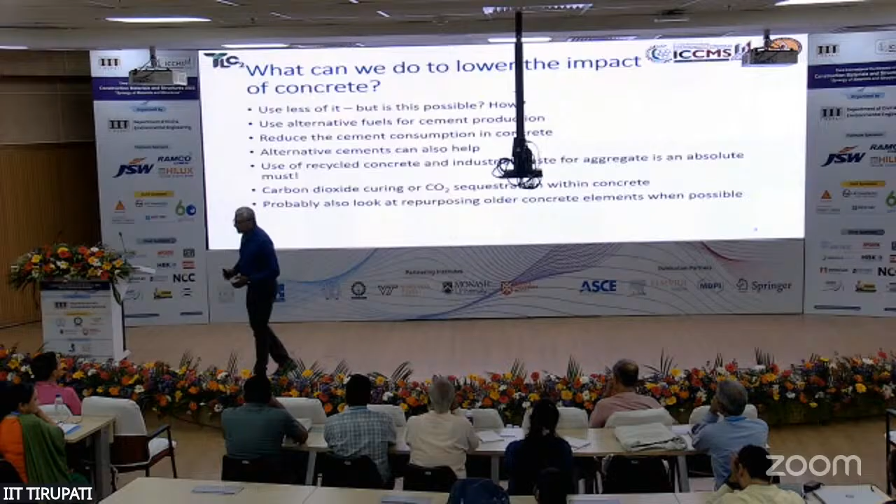With reinforcement, with structural concrete, we have to pay a lot more attention to what's going to happen in the long term. And we can also look at repurposing older concrete elements wherever possible, because there's no point in actually taking older concrete structures and demolishing to make aggregate all the time. But there may be some instances where the structural elements that we extract from buildings are in a condition that can be repurposed and reused in new construction.

Now, the only challenge there would be that you need to start thinking about designing the structure with that perspective in mind. You need to design for deconstruction. We know very well that it's not very easy to remove entire elements which are perfectly, which have a full dimension and reuse them in new structures.

So how do we design for deconstruction? Can we look at strategies by which we can remove concrete elements at the end of life? The end of life could not have been because of that element. Maybe something else caused the end of life for that particular structure. But can we remove these elements? Much like your Lego blocks, right? You have your Lego blocks, you put them up in certain shapes and sizes, and then you can actually remove the Lego blocks to get the pieces back again, reassemble in a different form.

And most important, obviously, if you want to really reduce the impact of concrete, is use it in such a way that it lasts for very long. In other words, make structures durable. If you make structures durable, you don't have to repair or replace structures very early. You have a longer life, and that makes your overall net footprint over the life cycle of the concrete structure reduced.

Now, let's look at some of these topics and understand what are some limitations which are bogging these down. For instance, alternative fuels. What are the options for alternative fuels? We have petroleum coke or pet coke. This is already being used in a big way by cement plants. It reduces dependence on coal, but the only problem is it's even worse in terms of emissions, right? So while we are reducing natural resources like coal, petroleum coke, again, is something which induces a very large amount of emissions.

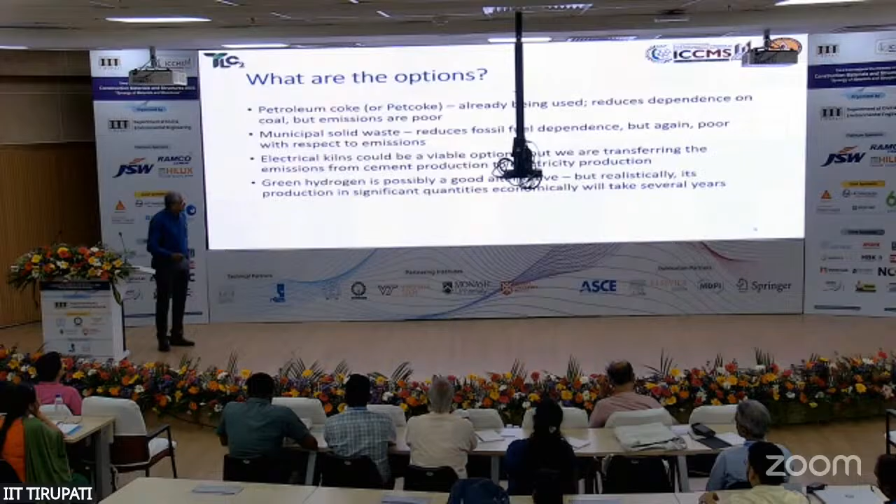And again, as I said, green hydrogen, realistically, to make green hydrogen, that is basically from the electrolysis of water, so that you don't release any other gases into the atmosphere. So green hydrogen is something that will become a reality only when the cost per kilogram of hydrogen comes to a reasonable amount. Right now, in some countries, they've achieved certain levels of economy with what they call brown hydrogen, which is not entirely from an emission-free process, but they have had some success in bringing down the cost of hydrogen. But this is something which is a subject of avid research.

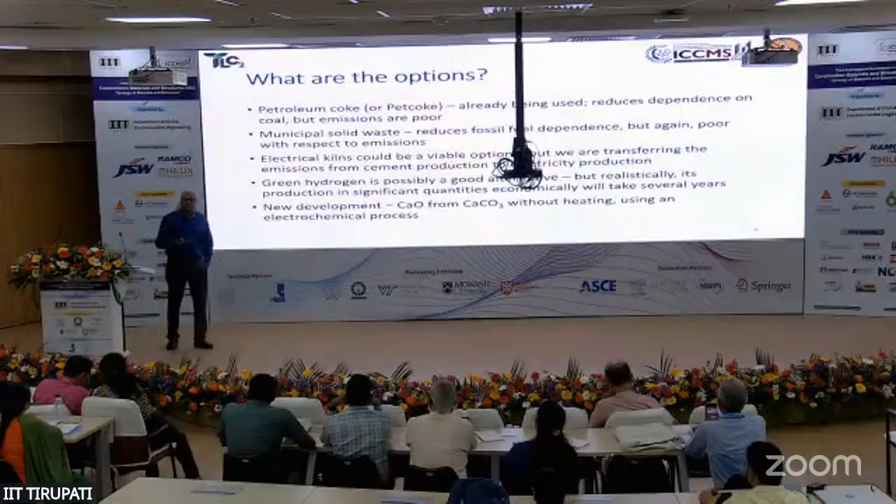A lot of people are looking at how to produce green hydrogen in an economical manner. Now, the other development is using calcium carbonate as a source for calcium oxide. But unlike in the regular cement manufacture process where we burn it at temperatures that release the CO2, can we have some electrochemical processes that can extract calcium oxide from CaCO3? So that's something which has also sparked off some interesting research around the world.

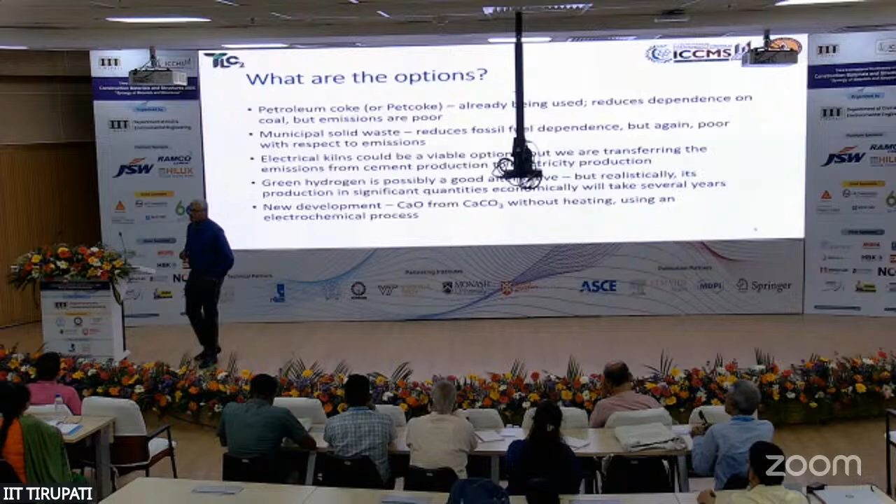Okay, but again, the question will come: is this process itself green? Is this process itself reducing the overall emissions, or does it need so much energy that you are anyway going to be emitting? So again, when we take up any of these research topics, especially to the students, we need to evaluate holistically what should be the overall impact. Because there may be one thing that you're doing that looks greener, but then you have another thing that basically could make the entire process completely negative.

So let's look at, of course, the second topic, that is supplementary cementitious materials. This is, as I said, accepted worldwide as the best way to actually reduce the impact of cement. Now, we have to, of course, pay attention to what is available in terms of SCMs. It turns out that many of the SCMs are either available in large quantities, but are difficult to get to, or they are available in small quantities and will not really serve the needs of the future generations. So what are we primarily talking about, at least in India, when we talk about SCMs? We are primarily interested in fly ash, right?

Okay. Anyway, fly ash, you all know very well, India's dependence on coal-powered power plants is not going to go down anytime soon. Our power demands are too high. Currently, our power generation from coal-fired plants is nearly 75% of the overall power in the country. So it'll take some time for that to come down. But until then, we have the fly ash available. Only problem with it is of variable quality. There's a lot of variability in the fly ash quality.

So only some of it can be processed and obtained to a quality which is consistent for cement production or for concrete production. So you need to be aware that not all fly ashes will give you consistent performance. You need to ensure that the physical and chemical characteristics are controlled. And that's not something which can be done for free. That has an associated cost. So there are companies which are now selling processed fly ash. And that is something which should develop a little bit more for us to really utilize fully the potential of all the fly ashes that are currently available in the country.

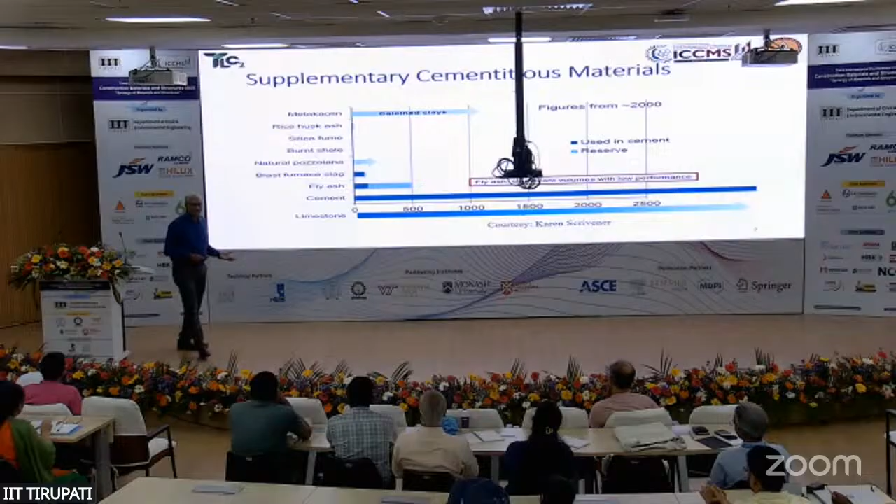The other possibility, of course, is clay-based systems like metakaolin, where you burn kaolinite clay at a temperature that induces reactivity. But then metakaolin need not be the only possibility. That means very high purity kaolin is not always needed. The research that we've done for several years on limestone calcined clay cement has shown that we can work with much lower grades of calcined clay, which are perhaps overburden in kaolinite mines and available in very large quantities and not really usable where kaolinite is needed, because they need a very white kind of clay. So this is mixed clay, which has red, brown, or yellow colors. And that is not suitable for the ceramic or paint or paper industry. So that's a lot of source for calcined clay that is available.

But then we don't really know how much of it is there. We need to do a lot more prospecting and find out how much quantity is realistically available for utilization in concrete purposes. Now, of course, limestone is the ingredient that goes to manufacture Portland cement.

Interestingly, in the country, there is a significantly large amount of limestone available for cement production. But it turns out only about 8% of what is available can actually be mined for cement production. And among this 8%, you always extract a lot of other material from limestone mines, which is not of the right purity to be used in cement production. So there's a lot of low-grade limestone available at these mines, which could potentially also be a resource for your supplementary materials. So that's where we need to also pay attention to.

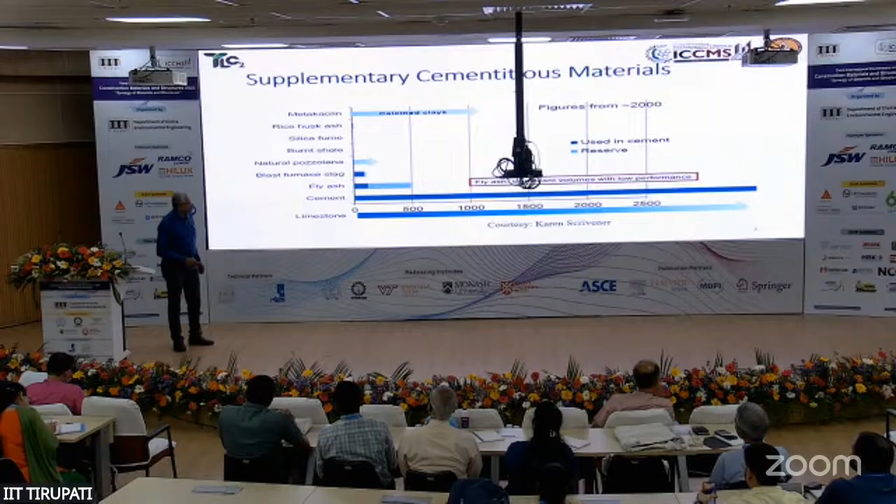Why do we need to do all this? It's been estimated that, at least in India, if we utilize all the available limestone to only produce Portland cement, then our limestone reserves, which are good for cement manufacture, may not last beyond 50 years. So you have to look at finding replacement materials, and that's probably the best way to think about why we need to replace cement.

And of course, in terms of a sustainability perspective, use of mineral additives is definitely a positive thing, because you are reducing the utilization of cement clinker, which leads to a lot of CO2 emissions. You're utilizing waste from other industries. You are also having an impact on the long-term durability. So net cost over a life cycle comes down. There's reduced potential for damage and deterioration in the long term, except in certain circumstances. So smart thinking would be only to use blended cements and not use ordinary Portland cement at all.

I think there are a lot of structural engineers here. You need to really take that step and promote only blended cements. No more relying on OPC. Please ban the use of ordinary Portland cement. You have to use only blended cement. We have to work with blended cement because that's the best way to cut down CO2 emissions from OPC. And if we work with blended cements, whatever be the shortcomings in certain exposure environments, we need to find ways to overcome that by smart design. Those tools for designing concrete are today available.

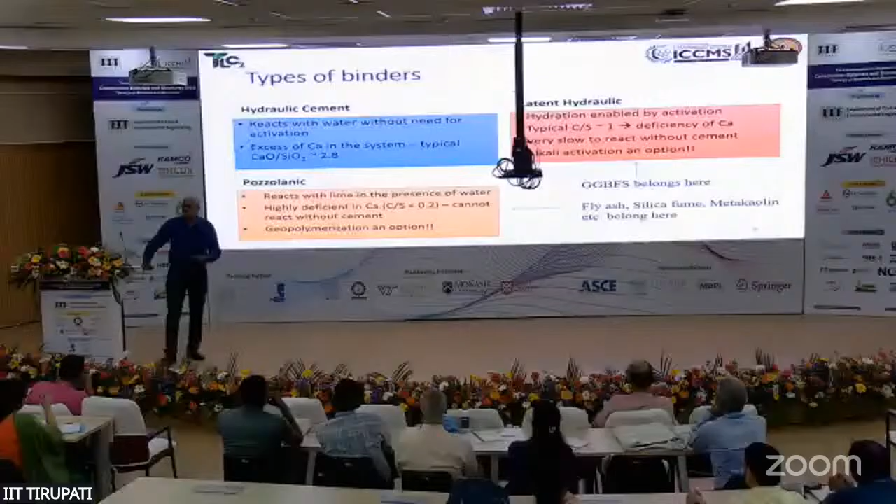So we have, of course, different types of binders. We need to realize what can perform where. So, of course, we have the latent hydraulic binders like slag, which have a fairly good amount of calcium to silicon ratio, which causes activity if you have some sort of activation done using an alkali or a sulfate.

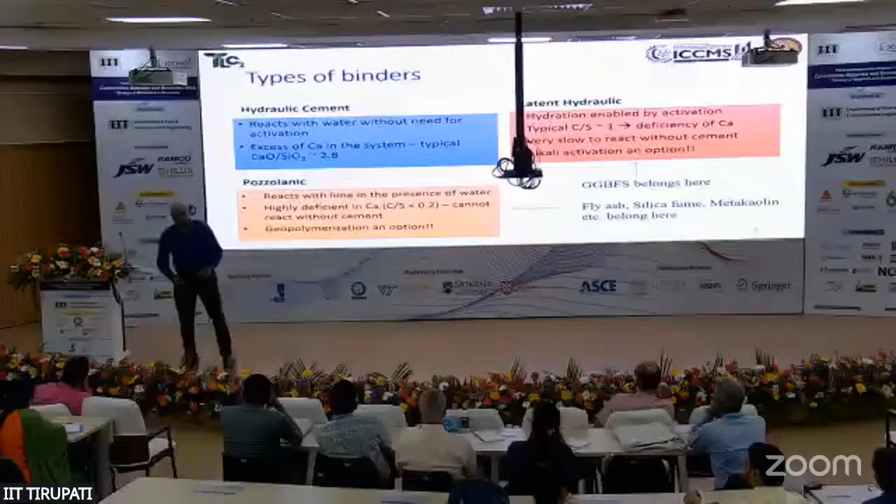But then you have pozzolanic materials, which are mostly rich in silica, and that silica has to be in the amorphous form. So there you have a deficiency of calcium. So you need some sort of a lime-based system, either lime produced from cement hydration or lime added onto the system to induce reactivity in the pozzolanic material. So depending upon the composition of the material that you have as a mineral additive, you can have different kinds of chemistries exhibited by these materials.

Now, what about concrete durability with supplementary materials? This is part of some research work that we had done, comparing the performance of concrete with ordinary Portland cement to concrete with 30% fly ash replaced cement, and then limestone calcined clay cement. So this was from an industrial production of limestone calcined clay cement that was undertaken by one of our cement companies.

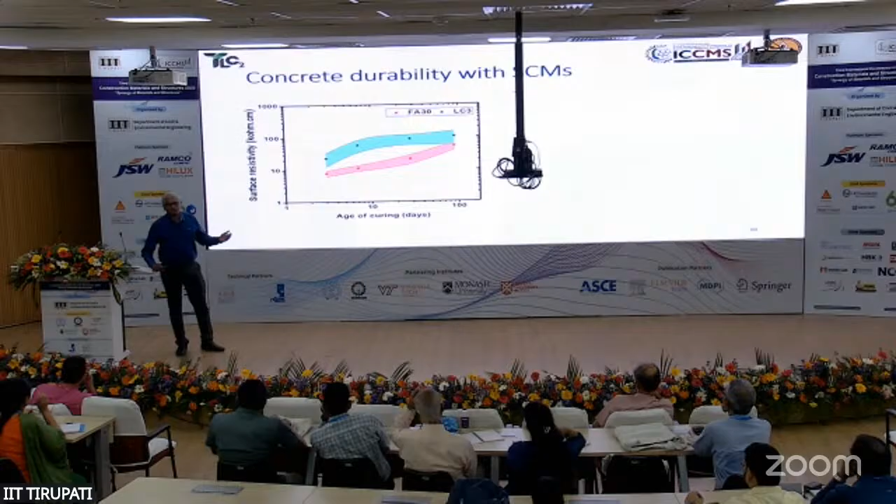If you look at resistivity development with respect to time, you can see that compared to fly ash-based systems, which eventually develop the same level of resistivity, the LC3-based systems are developing this much faster, obviously because calcined clays are a lot more reactive, and that kind of reduces the overall conductivity of your system and improves the resistivity at an early age.

And if you look at the non-steady state migration coefficient, which is today used to do a lot of durability design in chloride exposure environments, you clearly see that even for low grades of concrete like 30 MPa, your LC3-based systems are able to reduce the non-steady state migration coefficient to less than 2 × 10^-12 square meters per second, which is actually an acceptable limit for a very high quality concrete, right?

For instance, in the Mumbai Trans-Harbour Tunnel, that was the limit specified for the bridge and tunnel elements. So you can imagine that level of durability. That was a 65, 70 grade concrete. But here, this is a 30 MPa grade concrete, and you're able to get still a very high level of durability. So this goes to show that when mineral additives are used, you have the potential to improve durability, especially in chloride environment, at lower levels of structural strength.

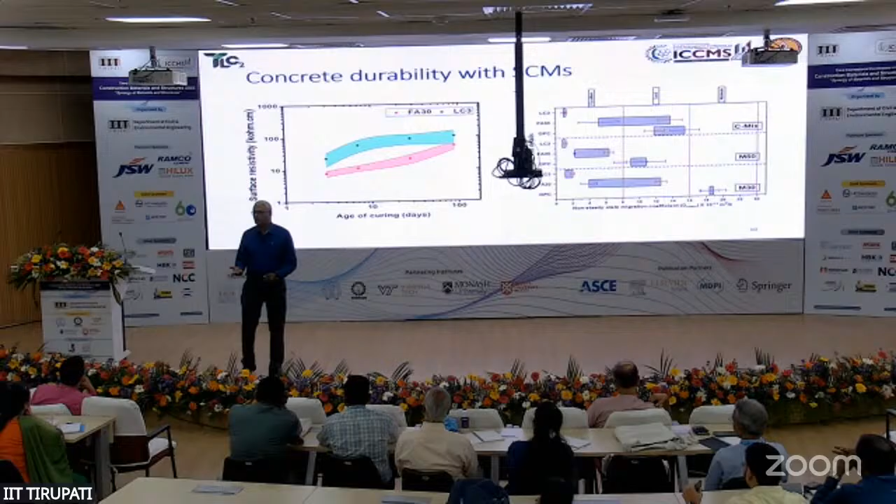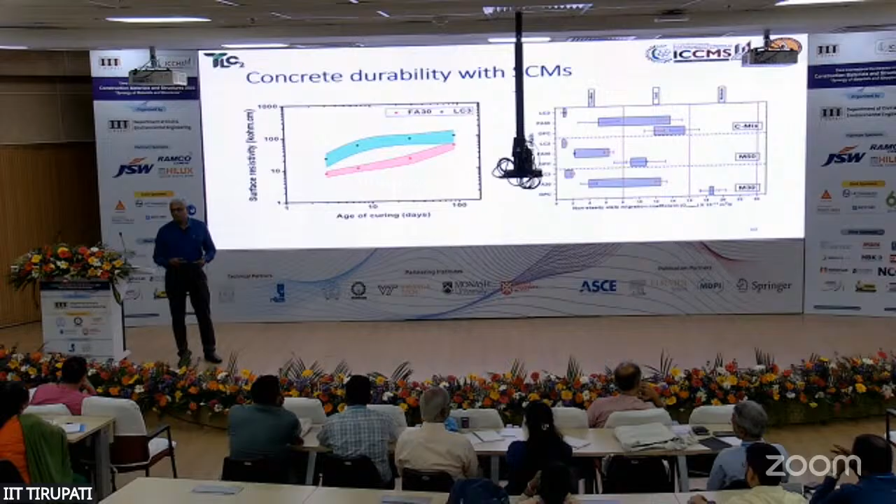And you don't always need very high structural strengths. The previous methodology of concrete design was you design for a higher strength, so you also get higher durability. But how high do you want to go in strength? Why do you want to unnecessarily keep increasing your strength? Your brittleness also goes up. You have a lot of other problems, autogenous shrinkage. All of those things can be avoided by simply looking at mineral additives to increase durability at lower levels of strength. Now, what we also have to look at is the impact through life cycle assessment.

So at IIT Madras, under Professor Gettu's leadership, we undertook a lot of interesting studies to actually collect the data from cement plants and look at the sustainability impact of utilizing alternative materials. So we were able to attribute all of those different aspects like direct emissions from limestone, fossil fuels, pet coke, alternative fuels, electricity, transportation, and any other CO2 or energy inducing system that comes in the manufacture of the cement process.

And with that, we were able to calculate that your blended cements had much lower CO2 emissions overall, like your Portland slag cement, obviously because we are using very high quantity of slag as a cement replacement, is leading to a much lower emission as compared to OPC. Now, it's not enough to just say that you're emitting less. Are you emitting less over a life cycle? Are you also producing durability in the concrete? So that's where we actually combined the emission aspect with the actual durability in different types of exposure environments.

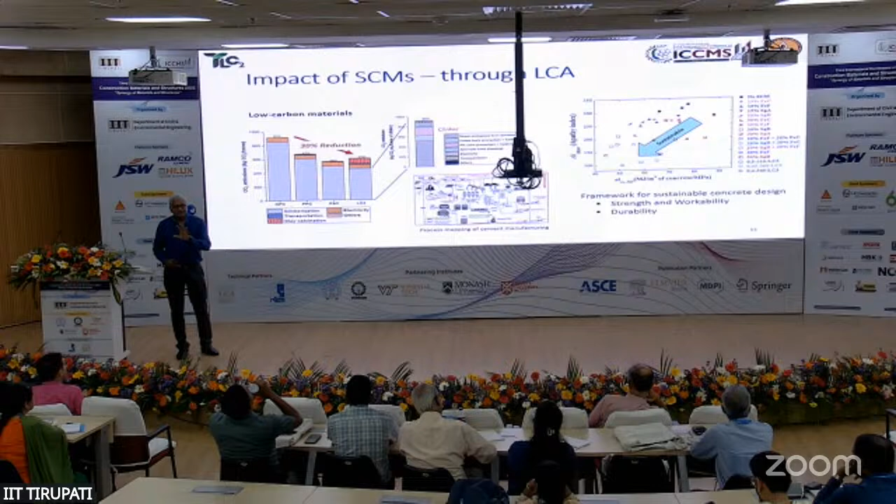On the other hand, on the x-axis, you have the energy intensity factor, which normalizes the energy for production of that 1 cubic meter of concrete with 1 megapascal strength. So here in one shot, you get strength, you get energy, you get CO2, you get durability. And with this kind of an approach, you're now able to look at the sustainability impact of different types of combinations and use this as a basis for determining the right strategy for concrete mixture design.

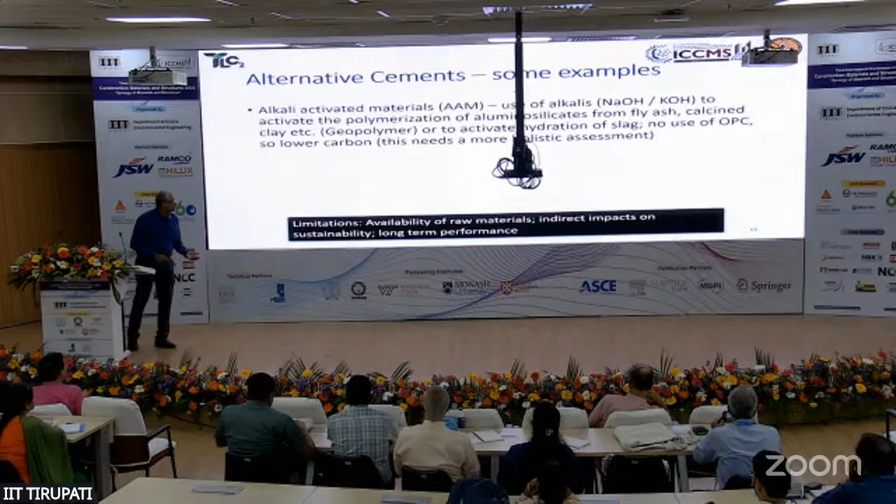Now, alternative cements, I said, you have, of course, alkali activated systems where alkalis like sodium, potassium hydroxide are used to activate polymerization of aluminosilicate materials like fly ash or calcined clay. Or in case of slag, you do alkali activation of the hydration of slag. You produce slightly different systems with both of these approaches, but ultimately you're working in a system without any Portland cement.

Now, calcium sulfoaluminate belite cements, again, in China, these are really big. The idea is that you produce cement at a lower temperature, with the right kind of approaches of selecting the right raw materials, and overall lower carbon dioxide emission happens in this process. The only problem here is the alumina sources that you need are quite expensive, like bauxite, for instance. Even to produce calcium aluminate cement, the bauxite could be very expensive as compared to limestone. Magnesia-based cements, I already talked about. These are essentially cements that absorb CO2 over their life, and then the net CO2 becomes negative.

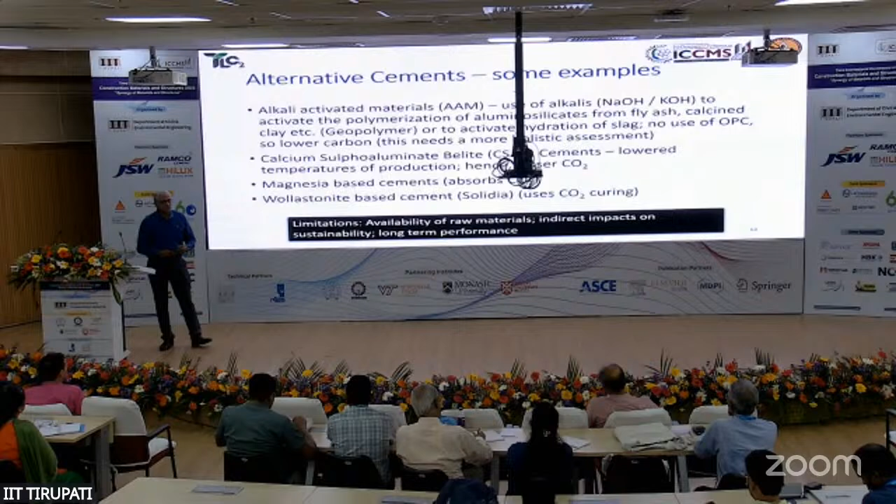Wollastonite-based cement has also been used. Solidia is a company in the US that came up. It used carbon dioxide curing to convert the wollastonite-based systems into CSH and calcium carbonate. Now, unfortunately, many of these companies that looked at these alternate cements really did not get the right business and closed down. In fact, even companies that came up with geopolymer systems commercially did not really do that well. Although there have been some companies that have had some level of success in niche markets.

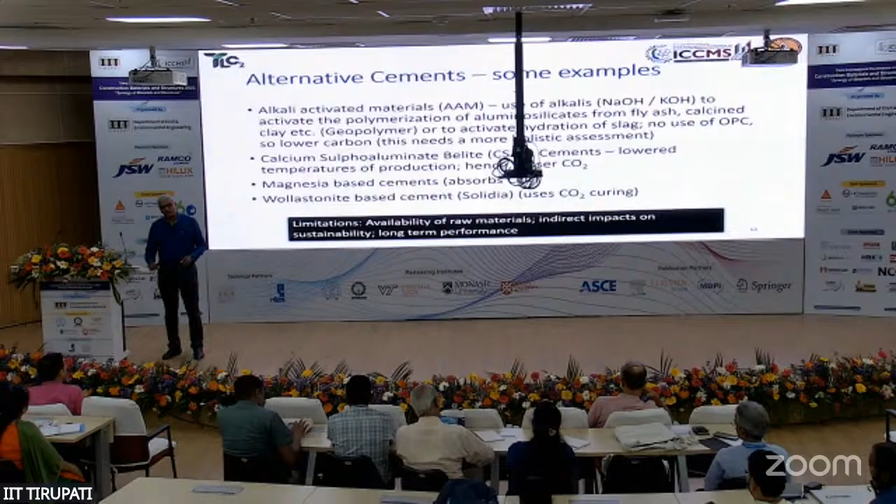Again, we have to look at the scale. Are we able to address the problems at scale? In Portland cement, we're talking about 25 billion tons of concrete. Now, that's the scale that we need to look at. Are the materials that we're proposing capable of making a difference at that scale?

Maximizing aggregate in concrete obviously is very important from the point of view of reducing cement, and that automatically reduces your CO2 impact, right? How do you maximize aggregate? One strategy could be particle packing. This is a concept that we borrowed from the powder metallurgy industry, where they look at particle distributions and then optimize them so that the material can get the best solid packing without much voids in the system.

So particle packing is an approach which could be followed. It's a very simple approach to follow for mix designs, brings about better economy. And of course, because you're having greater amount of aggregate in your system, it gets better dimensional stability.

Now, this example from Sweden and the bridge tunnel system connecting Sweden to Denmark between Copenhagen and Malmö. This has a tunnel, dredging and reclamation and a bridge. It was designed for a 100-year service life. And note that all of this was done at total cementitious contents of well less than 450 kilogram per cubic meter. Here, they had used the particle packing system to bring down the need for large amounts of cement.

Because obviously, structures are going to be massive. If you put more cement, there's going to be a lot more heat generated. You want to avoid heat-related problems. So this is one possible way of actually reducing the extent of cement, increasing the aggregate content, get better dimensional stability, reduced heat, and still produce concrete that is highly durable.

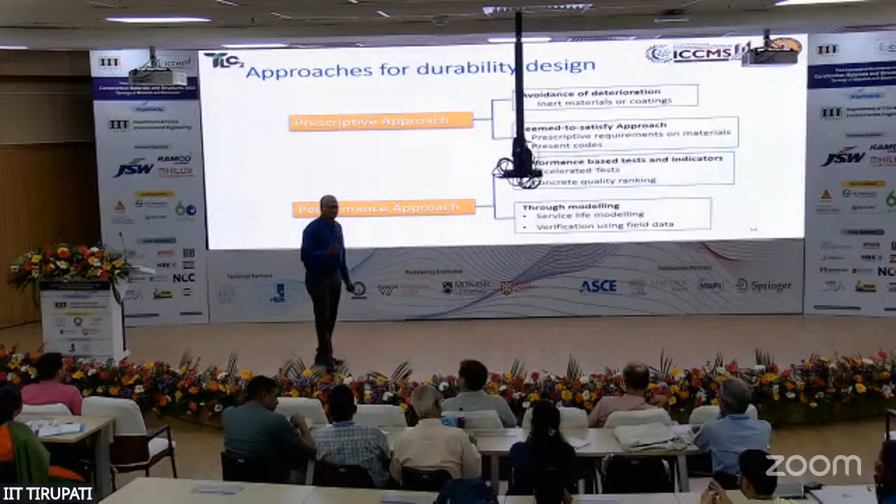But what it doesn't seem to touch upon is how is this concrete being put in service? What are we doing in terms of compaction, curing, workmanship? Are we paying attention to the initial concrete temperature? Can we then start looking at bringing those things into the specs and defining what is the performance that we need? And that's what is called the performance approach.

So just to give you an example, prescriptive specifications can include curing duration and method, say 7 days curing by water fogging or ponding or something like that, you say that minimum cement content should be so much, maximum water cement ratio should be so much, you have to use only this type of binder. Those are prescriptive specifications. A performance means you are having a measurable parameter that you're defining.

Now, interestingly, in many of your specs, you would have already seen cover depth as a prescriptive spec. It'll say that for an extreme exposure environment, use 75 millimeters cover depth, right?

What can we do here to make it a performance spec? We actually measure that cover. And measurement of cover is not that difficult. You have cover meters available, very cheap for construction sites, not a problem at all to actually get these cover meters. Determine cover, not on all the elements because that will put off your project by several months. You want to do it on some selected elements to ensure that people have been paying attention to actually doing the right job with performance specs.

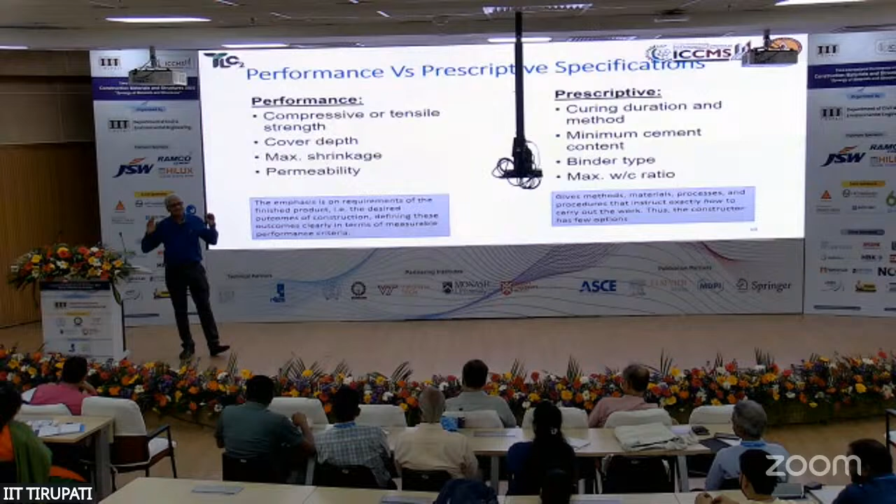Now, I often joke that when we enter hotels in India, we have this metal detector. Doesn't matter what you have in your pocket, it always beeps, right? Maybe in a construction site, we have one of these large detectors. When the truck arrives, it beeps. It gives the contractor some idea that, okay, somebody's checking something that I'm doing, right? Maybe that would have been a good idea to increase durability on construction sites.

Now here, a performance spec example is the new Panama Canal, which was looked at to determine what would be the control of the concrete quality on site. So here what they did was they established the concrete quality that is needed in the lab as 1,000 coulombs of rapid chloride penetration. And they correlated that with a field-based test, that is the resistivity measurement. And they found that for a certain level of chloride penetration, this is the resistivity that I want to have in the system. They use the resistivity to actually measure the parameter directly on the constructed elements.

So look at this. We don't have to rely anymore on lab specimens. We are actually measuring directly the durability on the site. Of course, there are issues with using resistivity directly because you need to be aware of the moisture conditions, presence of reinforcement, several issues are there. But if you play within the confines of what this can do, then you really have an approach which can be utilized to determine durability of constructed elements.

Again, an example from Doha Metro. This is an L&T project where they looked at different types of concrete elements in the same metro construction project. You had concrete in contact with the ground, concrete not in contact with the ground, and high-strength concrete for internal columns. So obviously, we know that when concrete is in contact with the ground, we need to have protection against chemical attack, if your ground has sulfates or chlorides. Concrete not in contact with the ground, there's obviously going to be carbonation, right? So the tests that were prescribed here to be done on the concrete and the limits were to ensure that the durability performance in those environments will be perfectly satisfied.

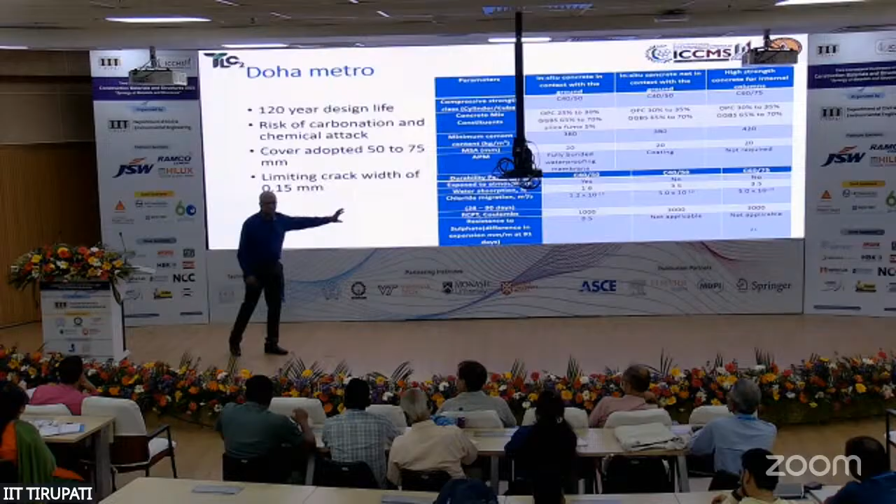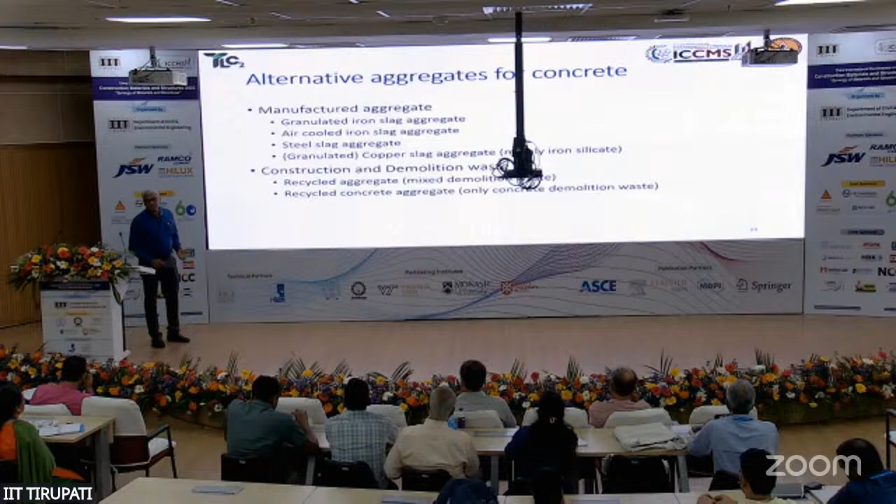Alternative aggregates, I think you'll have a lot more discussion later. I'll probably just touch upon it briefly. You have manufactured aggregate, which is from industries, or construction and demolition waste, where you actually crush the demolished concrete and utilize that as C&D waste. Now, the challenge obviously is, again, do we know where it is available? Is there a good spread? Can we arrive at a proper understanding of the logistics? Do we need to process and remove unwanted material? And what is the cost and energy impact of this processing? Is that going to induce more cost, more energy, more CO2? That has to be perfectly calculated.

Sometimes, of course, processing demands a lot of energy. And what is the long-term stability of many of these materials? Are they going to be stable in the long term? Because concrete we want to serve for a very long period of time. Do we have that level of stability from these materials? And for recycled aggregate, how to work out a sustainable method for processing. Again, a sustainability framework is very important. We need to look at all the possible operations that go into actually utilizing demolition waste, calculate the CO2 and energy impacts, and then evaluate whether the system is actually working for us or not.

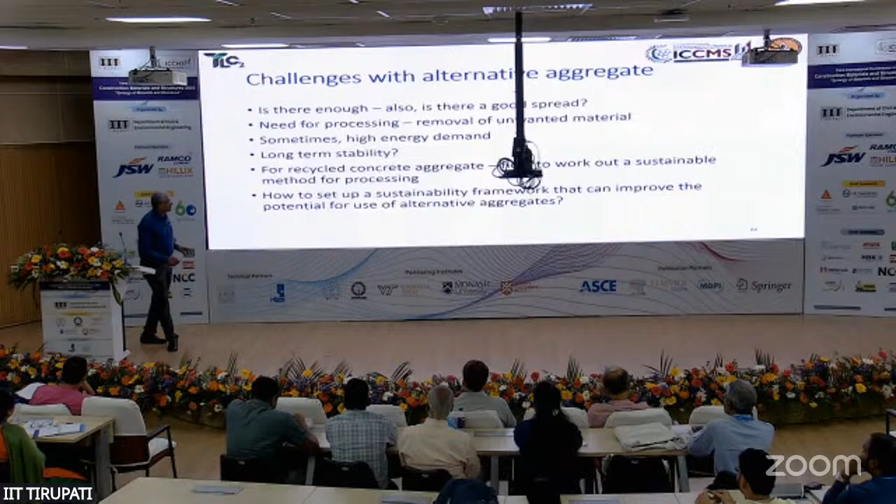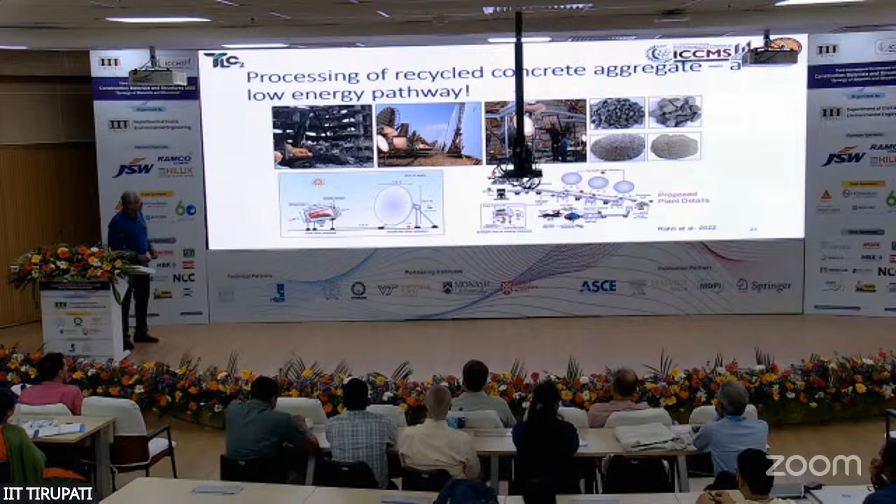One example of work that was done by my colleagues, Professor Gettu and Professor Surender, is to look at using concentrated solar to break down the mortar from the aggregate. And using this process, they were able to supply sufficient heat for thermal beneficiation and later crushed to obtain coarse aggregate, fine aggregate, and recycled concrete fines. So this approach is something that needs to be scaled up. We are still looking for possibilities with which we can scale this up. This was done at a facility in Mount Abu in Rajasthan. And CO2 curing reabsorption, I'm not going to talk too much about it, but several alternatives are based on net zero CO2.

Again, the issue is this science is still at a nascent stage. A lot of people are making a lot of big claims about it. My suggestion is take everything with a pinch of salt. We need to analyze these systems very carefully. They are not really all that they seem to be, okay?

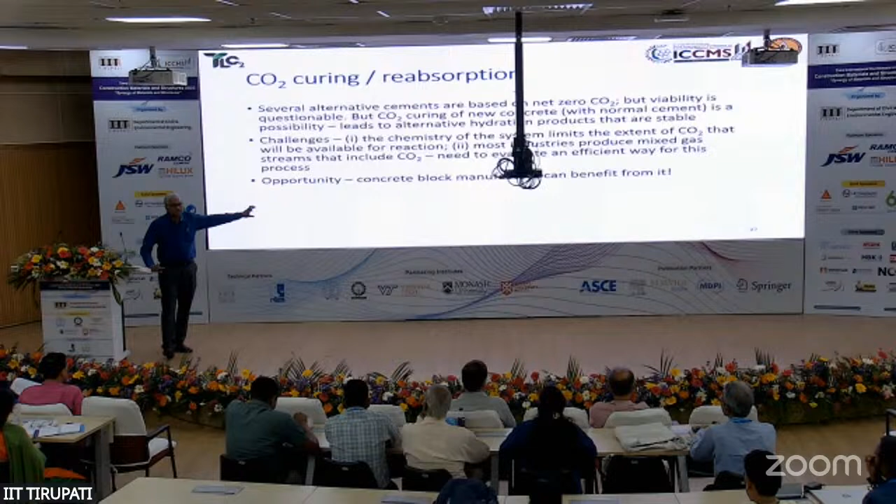The opportunity, of course, is that you have concrete block manufacture for unreinforced concrete elements, which definitely can benefit from many of these strategies.

Right, okay. The bigger picture: materials is only one part of the story. There's a lot more to be done to make structures sustainable. The process is extremely important. You need to look at the overall process of putting together your structure. As I said, today's emphasis, if you look at how electrical systems and appliances are being designed, people are looking at lowering operational CO2 and energy. We also have to pay attention to embodied CO2 and energy, which is why understanding material characteristics is absolutely important. And policy also needs attention.

One example, again, use of construction demolition waste. There are places where natural aggregate is available much cheaper than C&D waste. So why should the contractor bother with choosing C&D waste when they can get natural aggregate, unless there's a policy that drives it? For instance, in Singapore, they mandate that 20% of your concrete has to have recycled aggregate in it. That's a strong policy in favor of actually using C&D based systems, irrespective of the cost.

So obviously, this needs a concerted effort across different time scales, different scales of study. So we have set up a very large center. Tomorrow I'll talk about this in the workshop. This is the Center for Technologies for Low Carbon and Lean Construction. Somehow that, okay, maybe it indicates that my time is up. So thank you all very much.

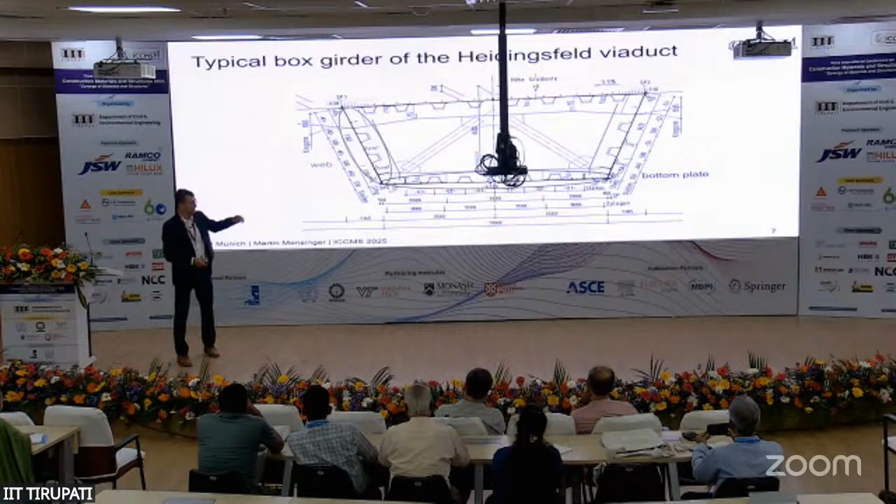During launching, in the web and also in the bottom plate, we have to face biaxial stress in the plates, because we have this hogging bending moment at the pillar, which causes stresses in the X direction - the longitudinal direction of the bridge. We also have the introduction of the bearing forces into the web, which causes vertical stresses in the Z direction. The bottom plate is stressed with biaxial compression from the bending moment, from the inclination of the webs, and additionally from the shear flow at the support.

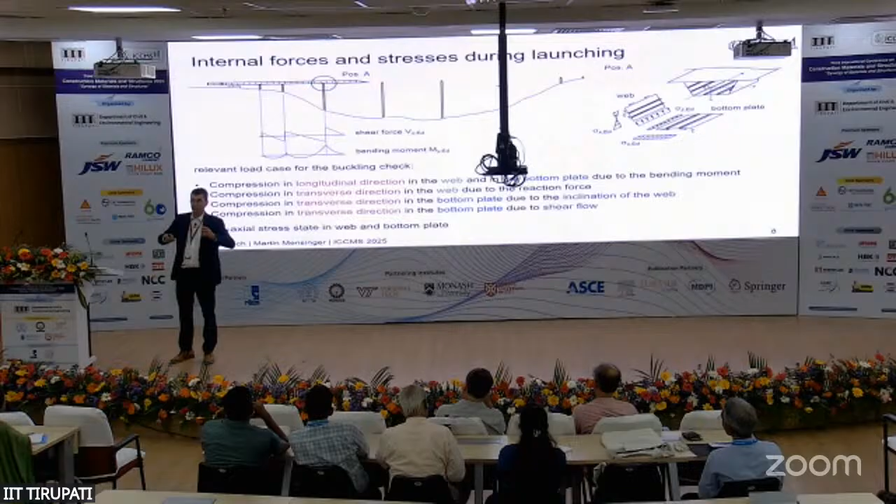So we have to design those plates against buckling under biaxial stresses. In addition, this design check normally rules the thickness of the web plates and the bottom plate. Therefore, it's really essential for a material-efficient construction to optimize those design checks. During erection, we have two different sliding systems that we use for launching.

Those two different systems of launching devices are influencing the buckling behavior of the plates, which is not covered by the codes up to now. At the moment, the codes just recognize in-plane forces, but no bending moments from eccentricities. And those bending moments from eccentricities are influenced by the launching device which is used, and there are significant differences. That was also one of our major things we focused on in our research.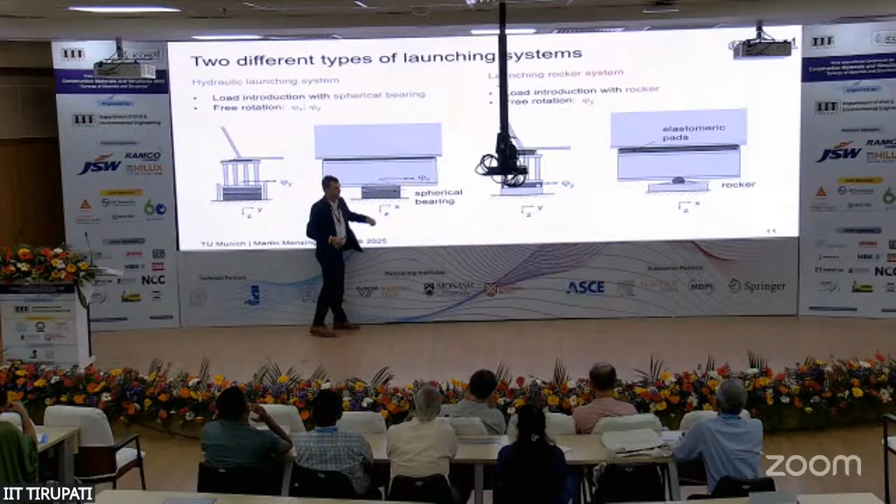Okay, now let's talk about those different bearing systems. The big difference is a degree of freedom around the longitudinal axis. In case of the rocker bearings, we can allow only a behavior like that in the longitudinal direction of the bridge, but we don't have this degree of freedom around the longitudinal axis as we have it in the case of the spherical bearing. So we have totally different bearing conditions, which is not considered in the buckling checks.

We were interested how those bearing conditions influence the buckling behavior of the web plates and the bottom plates of our bridge.

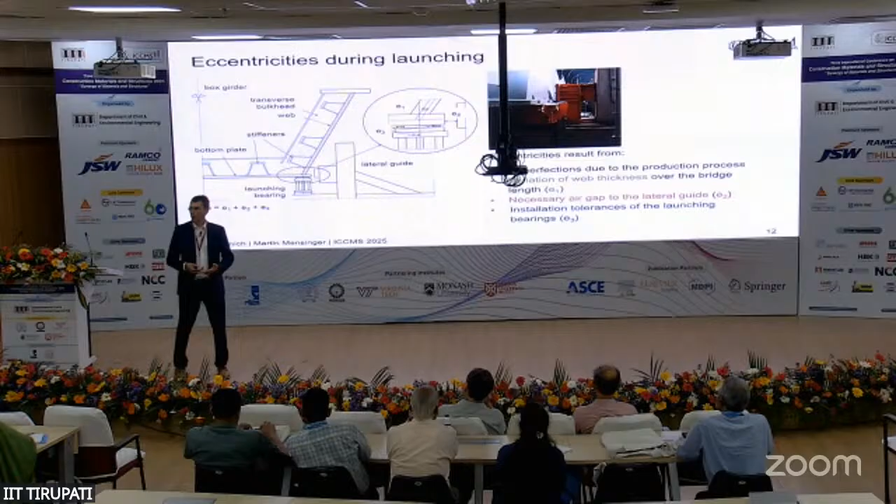And also we have always to recognize some eccentricities. We have eccentricity by design because the thickness of the web plate is changing, and therefore the center line of the web plate is also changing. We also have to allow some eccentricities for practical purposes, necessarily an air gap to the lateral guidance of the bridge. And in addition, we have probably some tolerances from erection we have to consider. And all those eccentricities are also ignored in all the design checks at the moment.

Okay, how to avoid it? A good engineer always tries to avoid any problem, so simple constructions are mainly the best one. One simple trick is, for example, to add some cross beams between the launching devices in case of the spherical bearings, and then we don't have to think about any eccentricities anymore, because all the moments from eccentricity will be borne by the launching device and will not be introduced into the web.

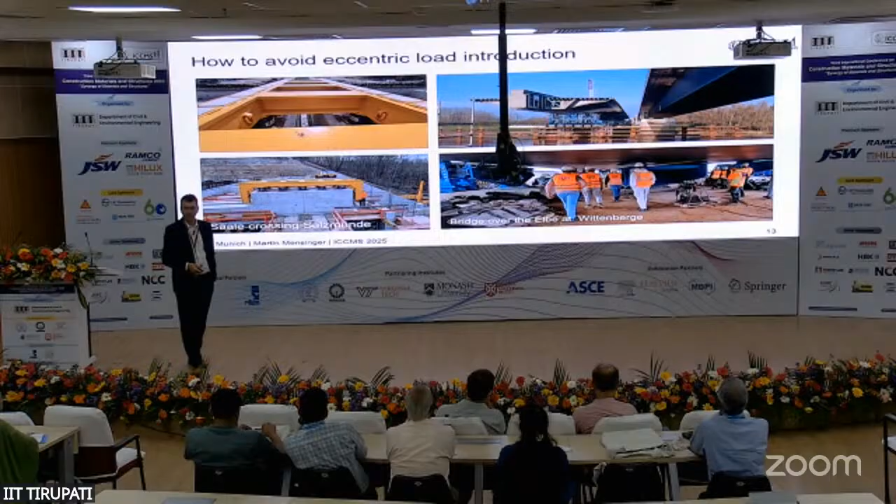So this is only possible in certain cases, for example the Saale crossing Salzmünde, and also again this bridge over the Elbe, where we used this small trick to avoid discussions about the buckling check. But normally you don't have the possibility to do that.

And we therefore tried to further develop the design check according to Eurocode 3-1-5. You see there was quite a high number of changes in the last years. My presentation deals mainly with a version of Eurocode 3-1-5 from 2019, and now there's a new one available already since April, so there's a continuous change. Also, some wording is changing, which makes it difficult perhaps to understand everything, but I try to do my best to explain.

Eurocode 3-1-5 in general provides two different methods for the buckling check of panels. One is the effective width method, which is used in the UK and also in France. And there's another method, the reduced stress method, which is preferred in Germany for bridges. Both have some advantages and some disadvantages.

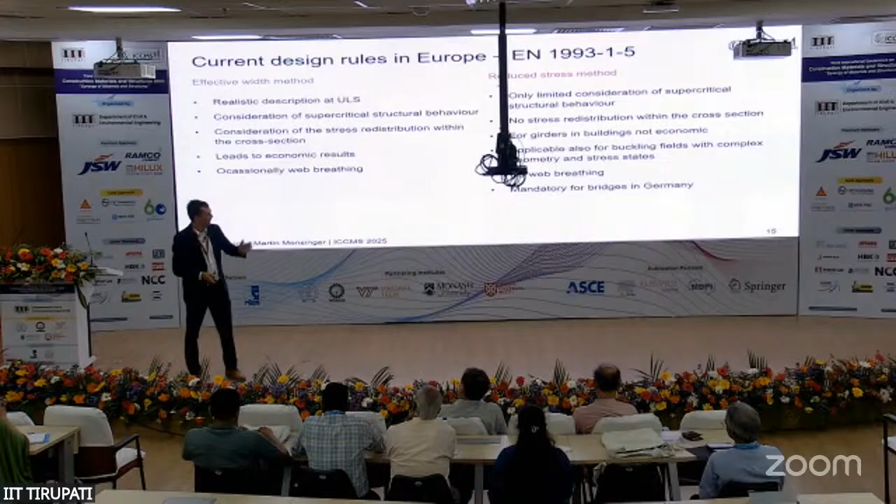The advantage of the reduced stress method is that you not only can design rectangular panels, but you are free in your form, and you also don't have to change the section values, which is very beneficial, especially in the case of incremental launching, where you have quite a lot of different construction stages, which would lead to quite a high number of different section values you have to consider if you apply the effective width method. But this is discussable, so preferences are more national than scientifically based. In Germany, it's also mandatory to use the reduced stress method for bridges, and that's the reason why we focused on this method.

There's also a possibility to design the buckling check, or to perform the buckling checks, by using finite element models. With finite element models, there were some recommendations in Annex C of Eurocode 3-1-5 for the imperfections, but those imperfections were not validated, so there's no big scientific background on this.

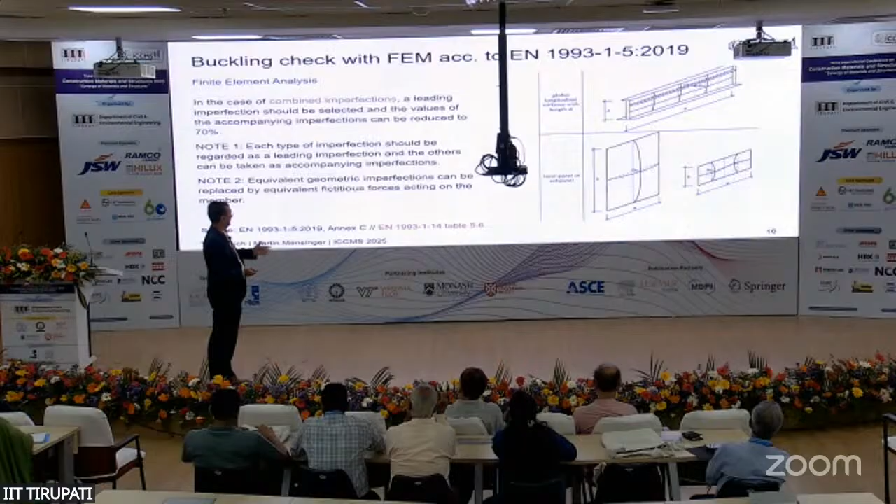For imperfections no scientific background could be found. And this Annex C will now move in future to the new part 1-14 of Eurocode 3, which deals with numerical methods in the design of steel structures.

Okay, coming back to the reduced stress method. So the design check with this method is performed with a formula which is more or less based on the well-known formula of the yield criterion from Huber-Hencky-Mises. So if you look at this formula, it has exactly the same format, but additionally to the yield criterion formula we added these reduction factors, rho Cx, rho Cz, and so on, where we consider the buckling behavior.

And in these factors we consider the buckling behavior for plate buckling and also the behavior for column-like buckling. So rho Cz and rho Cx are determined in a two-step procedure where we firstly determine the reduction factor for pure plate buckling, and then we check if column-like buckling may also occur, and then we get those factors. And I will talk a little bit more about these factors.

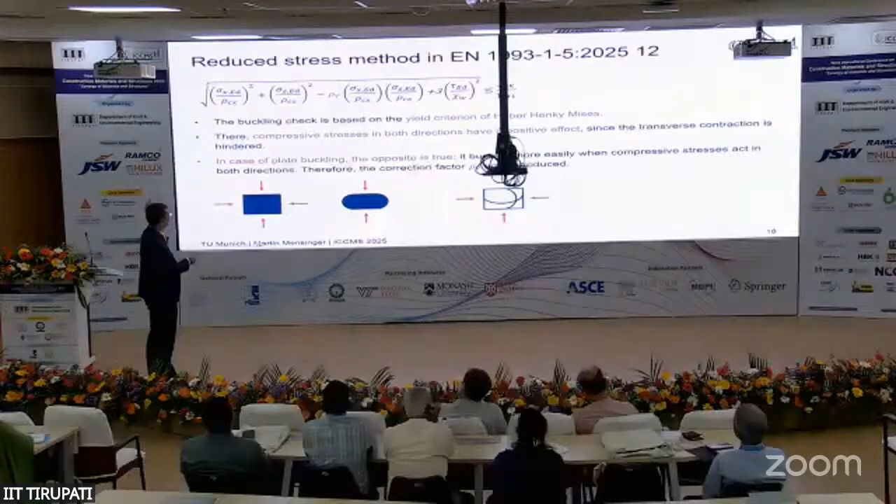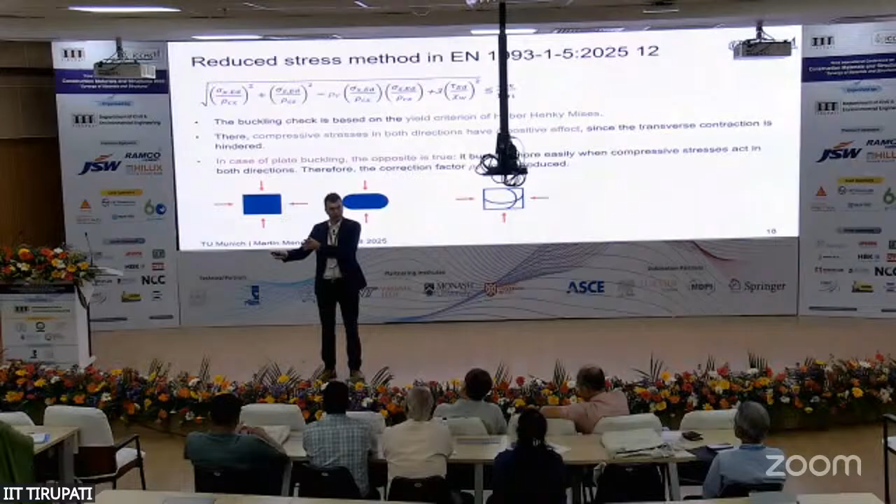And some years ago, this factor rho V was newly introduced. It was formerly called V only, but now it's called rho V. This is one of the things which changed between 2019 and 2025. And this was necessary because of this mixed term with the stresses sigma x and sigma z, because in case of yielding, it is positive if we have compression in x direction and also in z direction. But it's exactly vice versa in case of buckling. In case of buckling, it's unbeneficial if we have compression in both directions.

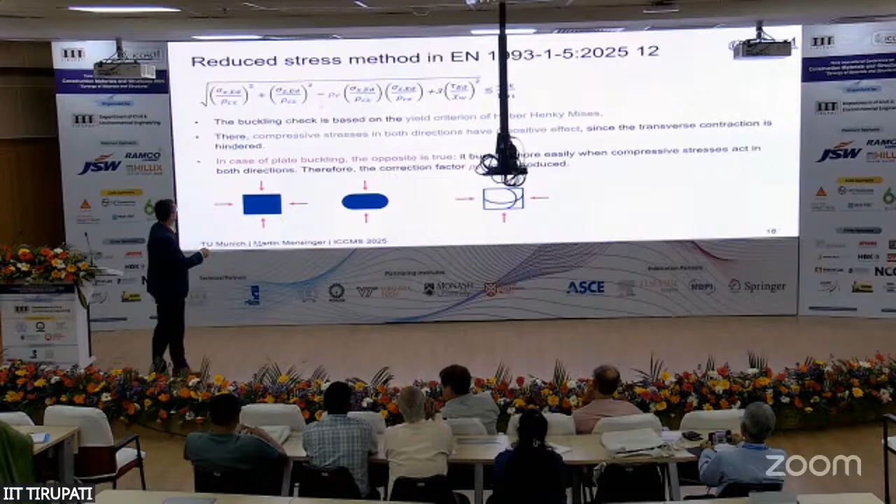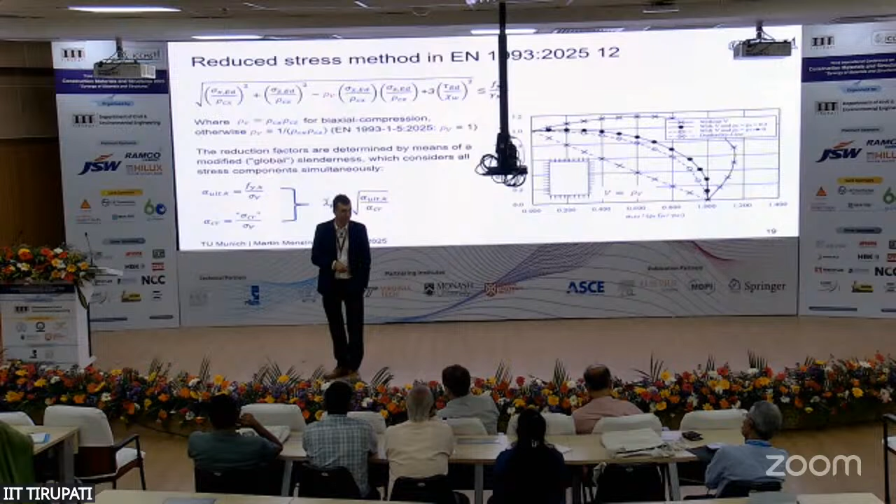It's very obvious, and we can't directly use the Huber-Hencky-Mises yield criterion for describing buckling. This is one major point which is criticized in this method. And to heal this mistake, this factor rho V was introduced some years ago by Ulrike Kuhlmann. But in the time between 2003 and 2015, quite a high number of bridges were built without rho V, and nothing happened. There was no accident, and therefore it was questioned: is it necessary to introduce rho V? From a mechanical point of view, it is necessary, but it is debatable whether it's also necessary for the safety level we reach with this design check, and this was the start of our research.

And just for your better understanding, those reduction factors rho are derived by using a related slenderness, lambda p, and for calculating the related slenderness, we are using two factors, something like a global buckling value alpha crit. So the procedure is the same as it is normally done for buckling checks for columns and also for lateral torsional buckling. The procedure for plate buckling is exactly the same.

But with these values, we are using all stress components in one factor. And this is a difference to the effective width method, where we are using only the component stresses for the buckling stress for each single component. Now, this is again an advantage of the reduced stress method. This is closer to reality.

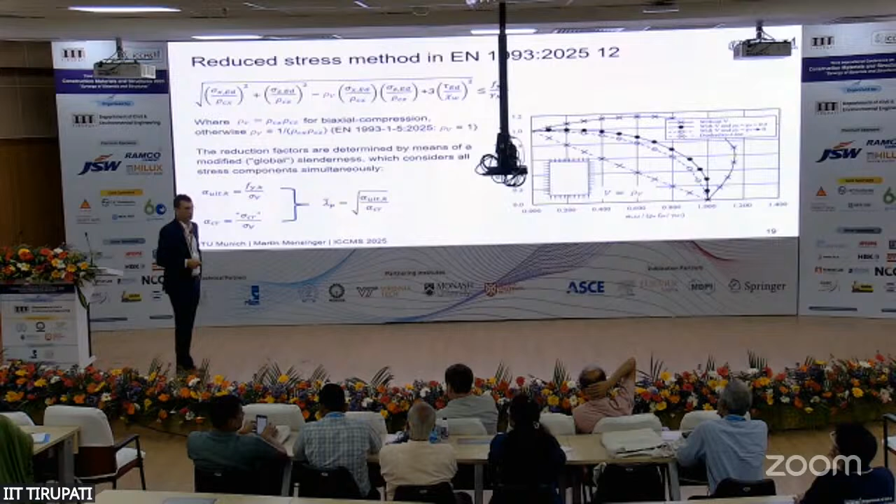Okay, and the other research question was not only if rho V is necessary, but there was also a discussion about the consideration of the torsional stiffness or of longitudinal stiffness. And also the question was, are the imperfections of Annex C on the safe side or not? And also, in my opinion the most important question, how do the different launching systems influence the buckling behavior of those plates?

So this is another bridge I visited with my student last week before I moved to India. This is again a large bridge which is constructed by incremental launching. And we had exactly the same discussion about the introduction of the load eccentricity with this bridge. So at Munich, we were allowed to perform some nice experiments with this newly developed test setup. And I will talk a little bit about that later.

And also we were allowed to perform some measurements of imperfections at another bridge, which is the Talbrücke Thulba, the Thulba viaduct, also a typical composite bridge with spans of about 100 meters or a little bit more. And some information about this bridge. So this bridge has, oh no, it has less than 100 meters, only a 90 meter span.

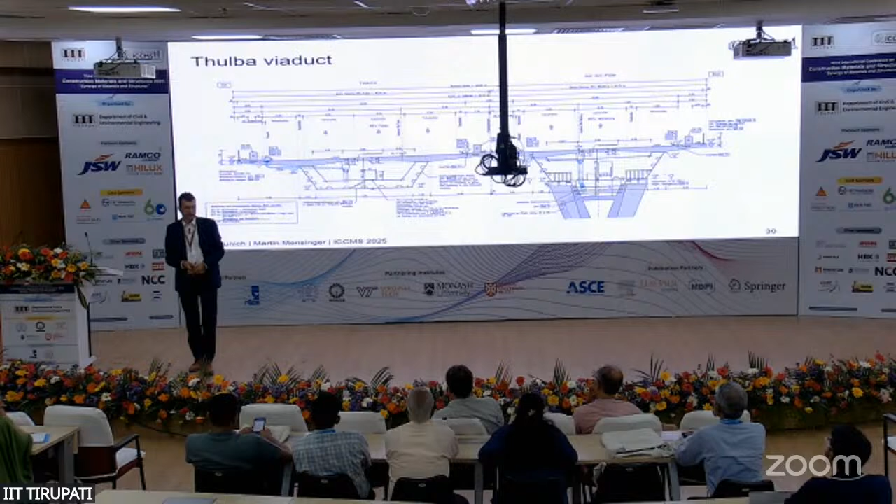Total length 460 meters. This is finished now, and it's also a typical box girder, composite box girder, as we use them in Germany. So in this particular case, we don't have an upper steel chord. Sometimes, for ease of erection, we also have an upper steel chord and then a composite slab above it. In that case, a little bit more material efficient, we have a pure concrete chord which is connected with headed studs to this U-shaped steel section during launching.

And we performed laser measurements in 3 segments of the bridge and measured the deformation of the web and of those web panels during the erection of the bridge in different phases. So here is the bridge. This is the launching nose, and then we have the different segments of the bridge, and we were able to measure 3 panels, and we did several measurements. We measured at daytime, in the night, and then during launching, when those webs were located more or less at midspan, and another case where they were located above a pillar, where we had also the cross-directional stresses from the bearings.

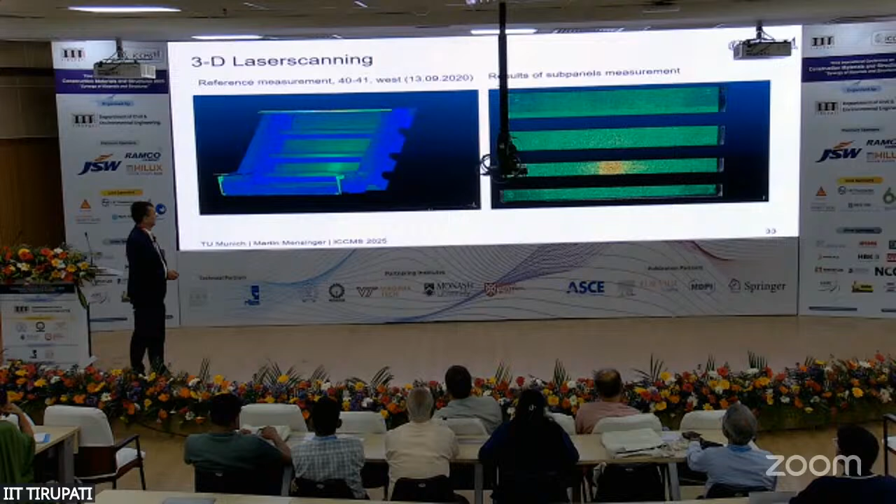And here you see just a small figure of that. And the interesting result is on this slide. You can see the assumptions of Eurocode 3 part 1.5, which is the gray line, are safe-sided. So that's good news. And we also found out that they lead to pretty realistic results compared to our tests later. And therefore the imperfections which are defined in Eurocode 3 part 1.5 can really be used for finite element calculation of the load-bearing capacity of those panels.

Now let's come to the buckling tests. The buckling tests were performed by Nadine Thomas. Nadine is a postdoc at my chair now. At that time, she was one of my PhD students, and she is a young mother with a baby of 1 year. So a little bit like Monica, the same living situation. And she performed these buckling tests in her PhD studies.

And for that reason, she developed, with a little help of mine, this test setup, which has a span of 11 meters, 7.5 meters high. This is high-strength steel. Also, the blue parts are high-strength steel. And we were able to perform tests on web panels with a size of 4 by 3 meters. And we were able to apply a bending moment of 34 meganewton meters and a cross-direction load of 8.6 meganewtons.

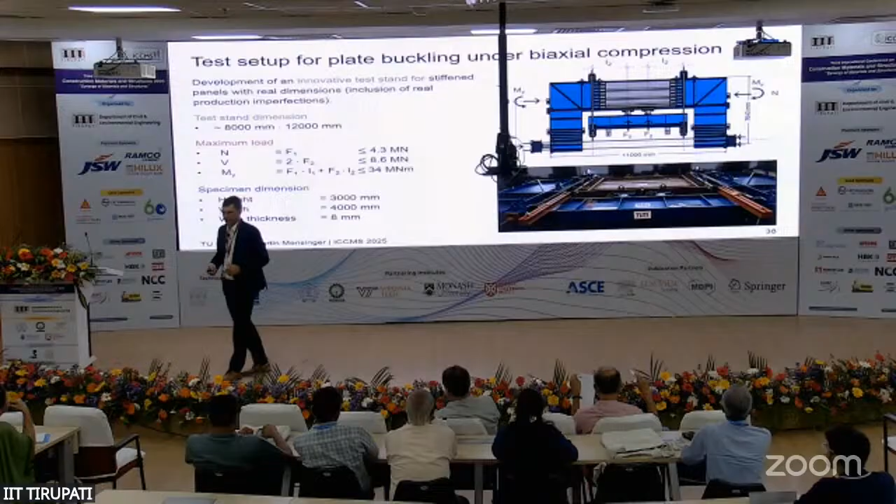So we are not in the range of the real bridge, but we are pretty close to those web panels, which is essential if we want to consider especially weld imperfections in the right way. Because if we choose the web panel too thin, we will have different web deformation and imperfections due to welding compared to realistic structures. That's the reason why we built this big test setup, and we were also looking at the different

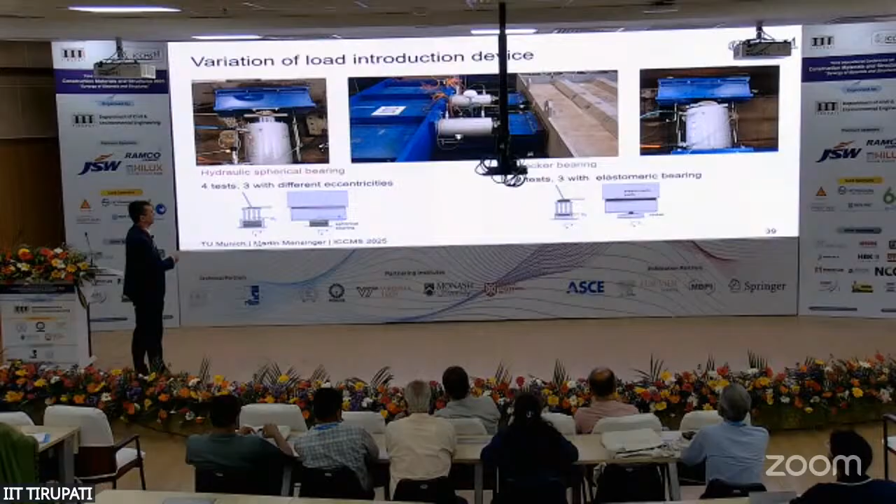bearing systems. So we performed 4 tests with hydraulic spherical bearings, and also 8 tests with a more common rocker bearing. So we were able to simulate that with this load introduction device. Here you can see it. This is a spherical bearing, and here we have this rocker bearing. You can easily see the differences.

During our first test, we applied the longitudinal load in the first steps in X direction. This is the force F1. So the bending moment was introduced first, and after that we introduced the normal force in the cross direction, which is not happening like that in real structures. In real structures, both occur simultaneously, but we feared that something would happen because this is a dangerous test. It's a large test with really high forces, and so we were a little bit cautious. That's the reason why.

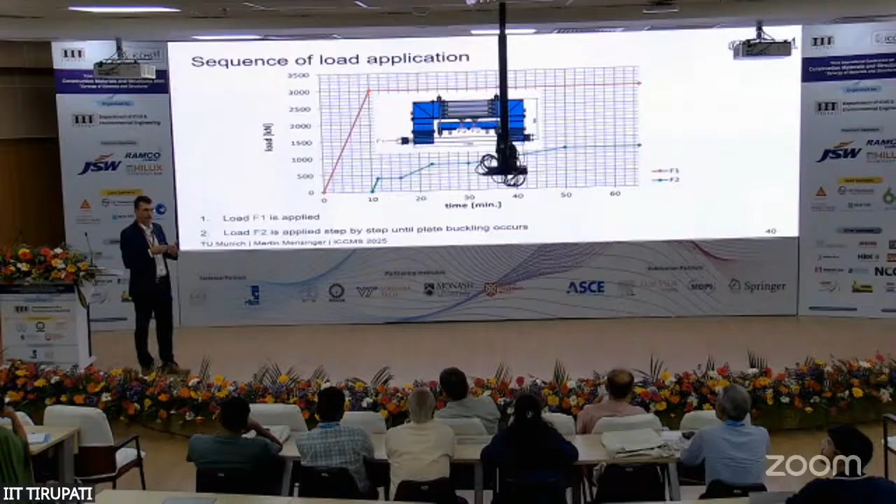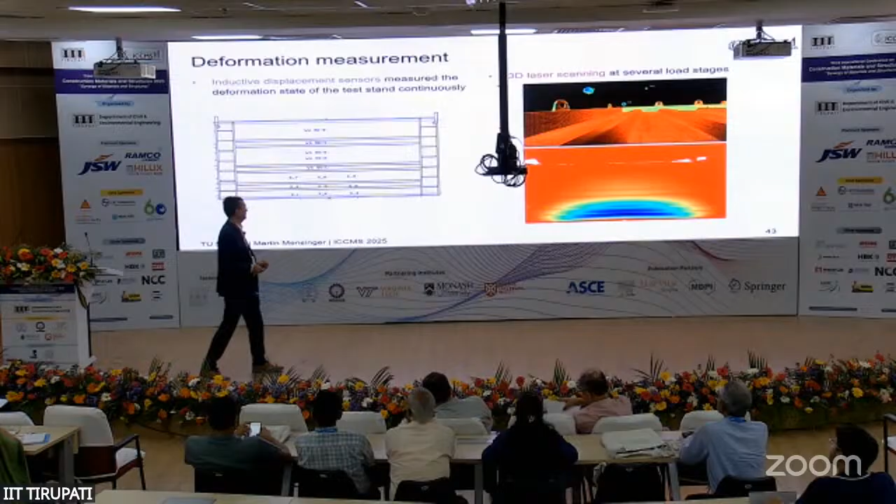And later on, we checked if this load sequence has an influence on the upper load limit, and I will talk a little bit later about that again. And also, we measured again the initial imperfections of our test specimen via laser, and we used quite a lot of other measurements like inductive displacement sensors, strain gauges, and optical fiber. I will not talk about that here because for us it's more interesting to have a look at

one test. This is one typical test specimen, and this is something I would like to ask you to focus on. Here at the beginning we saw that in this local buckling field, the first buckling field, initially due to the load introduction of the X-force, we introduced a multi-wave buckling pattern, and this buckling pattern in the next step acted as a stiffener for the cross-directional load.

So if we have a multi-wave buckling pattern in the first buckling field, we will increase the bearing capacity for cross-directional loading. And exactly that happened in this test. I hope you saw it, but we see it also later on a laser scan.

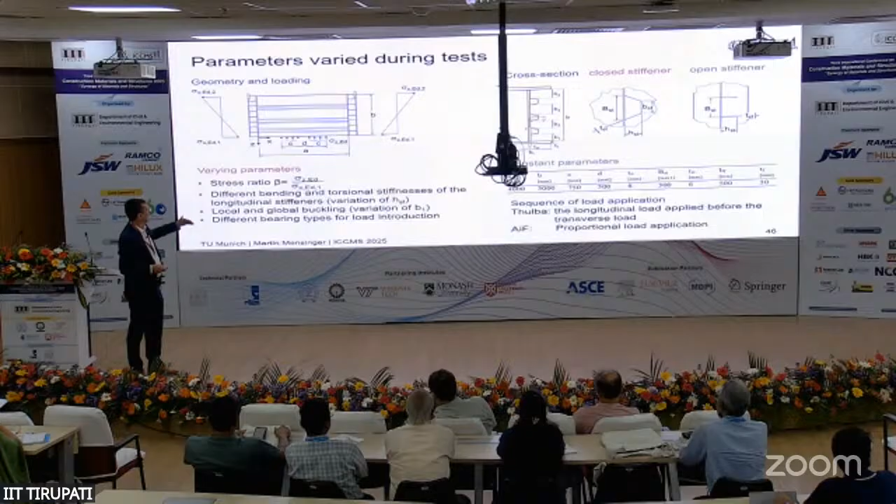Okay, we varied, and therefore it is important what the relation of the stresses in X direction is compared to the stresses in Z direction, because the stresses in X direction might lead to this multi-wave buckling, which then enhances the bearing capacity for cross-directional load. And therefore, that was one reason we varied this in our tests. We kept some parameters constant, but overall we had a lot of variations.

And during our tests we observed 3 different failure modes. In some cases we had buckling in positive Y direction. So this is the direction here, up in the direction of the stiffeners. And this is the case when the longitudinal stress is dominant and the cross-directional stress is small. If the cross-directional stress is dominant and the longitudinal stress is small, we will have a failure in negative Y direction, this direction.

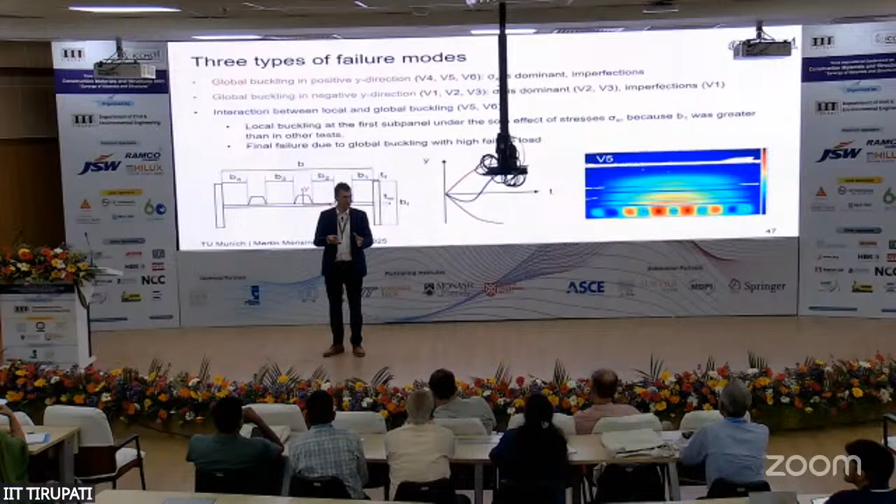And sometimes, as in the test we just observed with a short video, we have this situation that we have this multi-wave pattern in the lower buckling field, which stabilizes the panel and will help to increase the bearing capacity in cross direction. I'm not sure if we should consider that in the real design, because due to welding imperfections, we may have the situation that in certain cases, this pattern will not occur in reality. This depends on the welding imperfections. Yes, and this is something which we should keep in mind and also discuss critically if we should accept that.

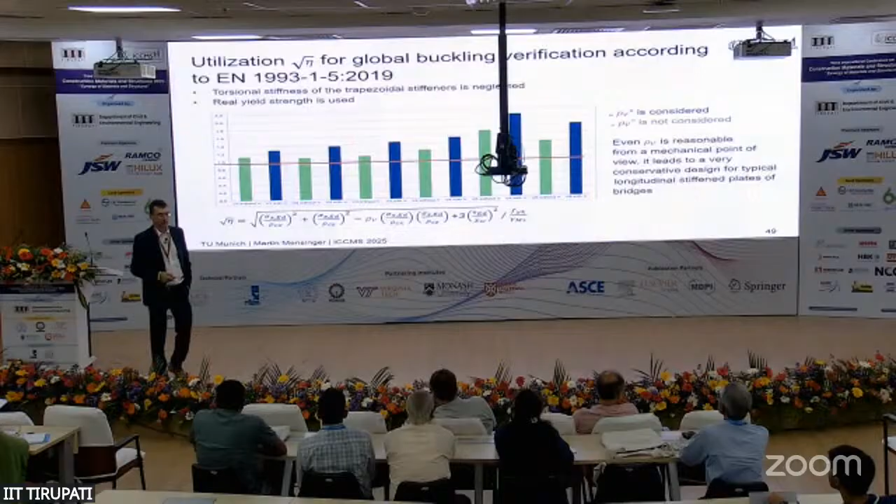Now let's have a look and compare the test results with a design approach according to Eurocode. And what we found out is that we are always conservative with the Eurocode design, even if we neglect the newly introduced value rho v. We are always still safe-sided. So the blue column is with rho v, and the green one without. And this is a quota between the test result compared to the design according to Eurocode. And so even without rho v, we are safe-sided.

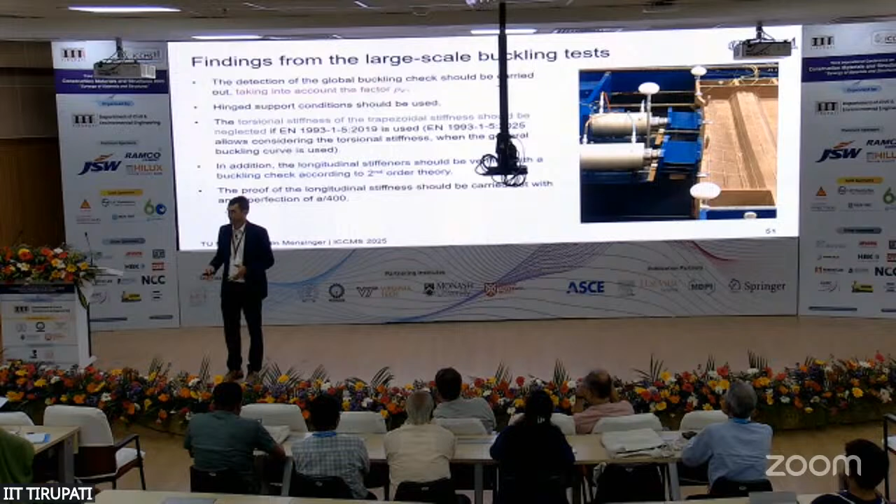Okay, and some of our findings are: I think we should consider rho v from a mechanical point of view, but we should discuss lowering the overall safety level. And also we should neglect the torsional stiffness of the trapezoidal stiffener. And in addition, we found out an additional design check against just normal column-like buckling of the stiffener would enhance the accuracy of our design, which is not necessary up to now.

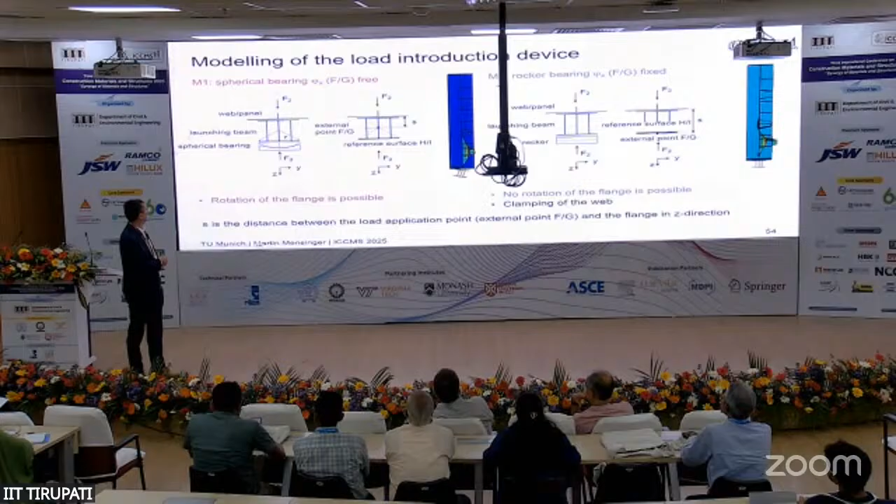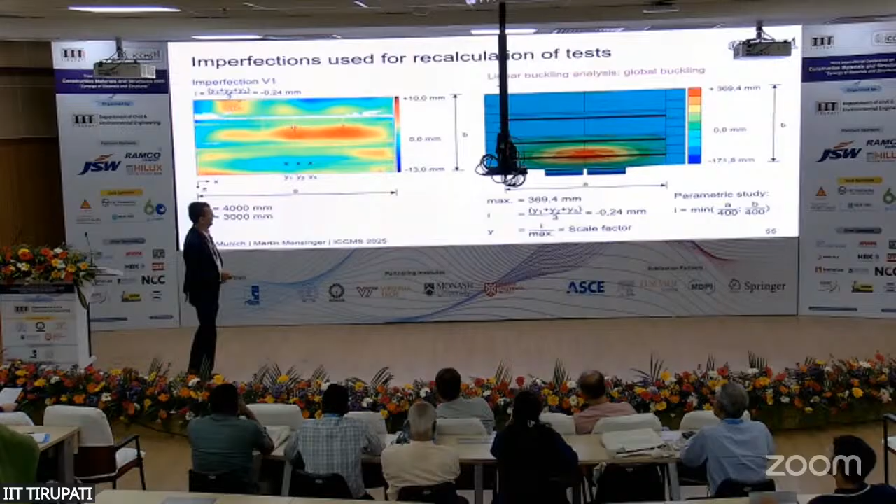Okay, let's move to the numerical investigations. We also considered the 2 different types of bearings in our numerical campaign, and we used different approaches for the numerical calculations. One approach was using the first buckling mode and calibrating it with imperfection values from the measurement to recalculate our tests. Another was using the overall imperfections and also using combined buckling modes for the calculation of the buckling fields.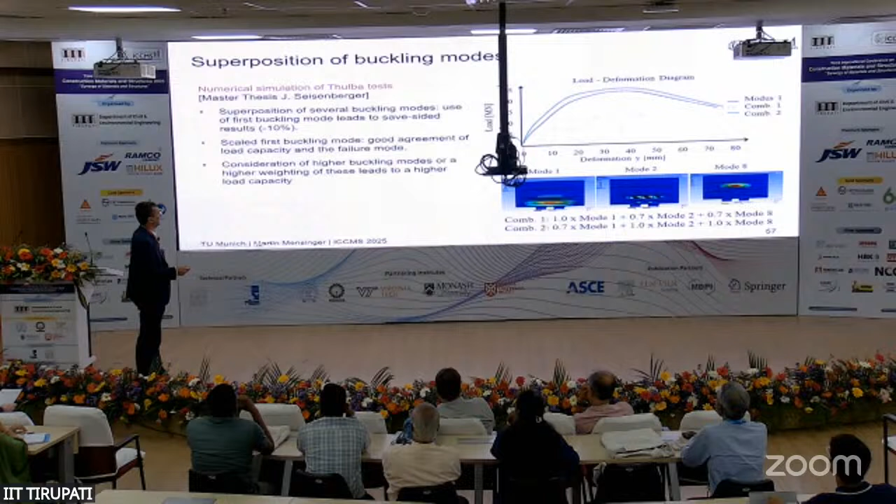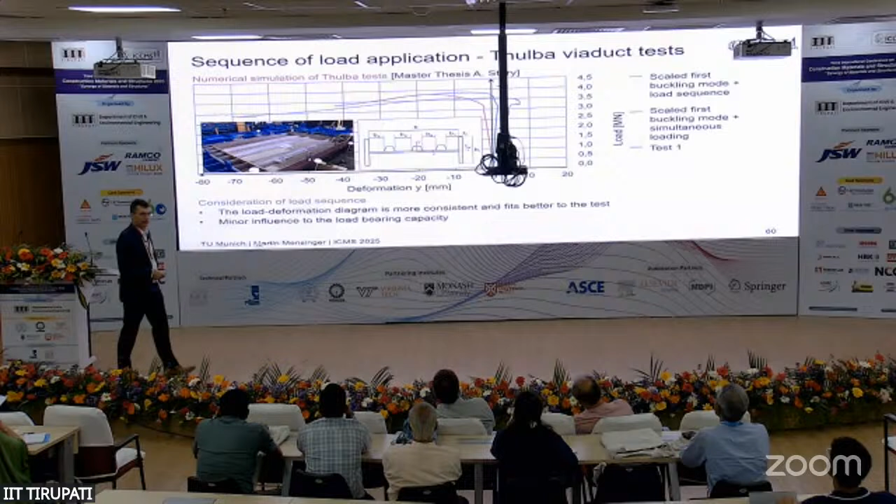And this was done with several master theses. Julian Seisenberger, for example, was looking mainly at the superposition of several buckling modes, and we found out more or less using the first buckling mode is okay. And also, again, we have this positive effect of multi-wave buckling in some cases, as I already explained. Then we were discussing the influence of the load sequence, and this was done by Alexander Stary, and we found out in that case that it has no influence on the ultimate load, but allows us a better understanding of the behavior of the test specimen during the test.

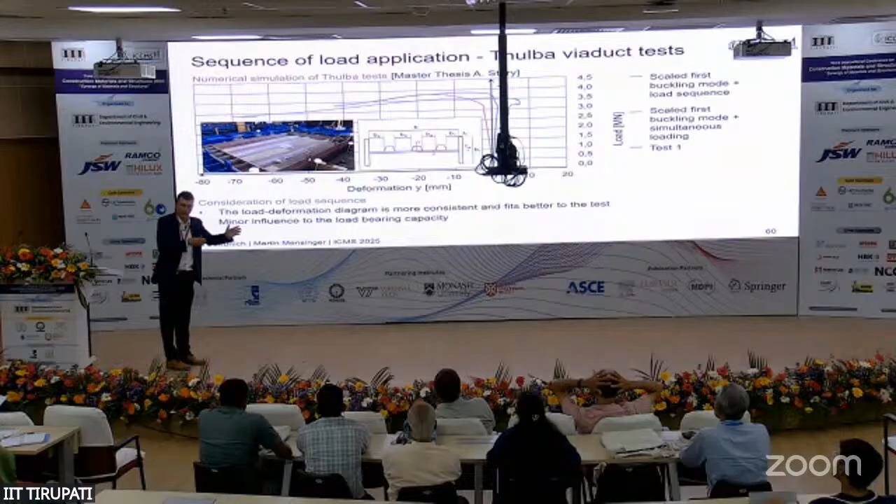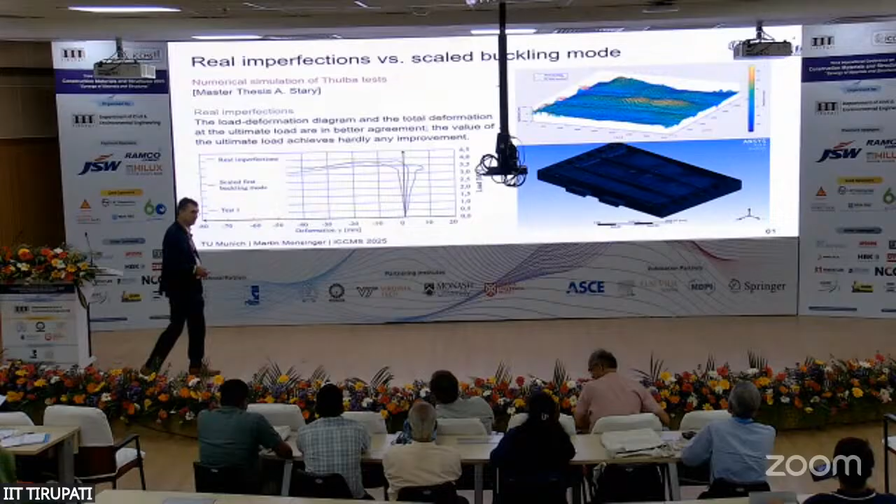So we had a change of the sign of the deflection. At the beginning, the test specimen moved down, and later on it moved up again. And by considering the load sequence, it is possible to calculate this load-bearing behavior, but it's not necessary for calculating the ultimate load. And again, using the measured imperfections from laser scanning will lead to more or less the same result. So using the first buckling mode is a good approach, also compared to our measured results. And what we found out in all our calculations is that we slightly overestimated the load-bearing capacity with our numerical calculations compared to the tests.

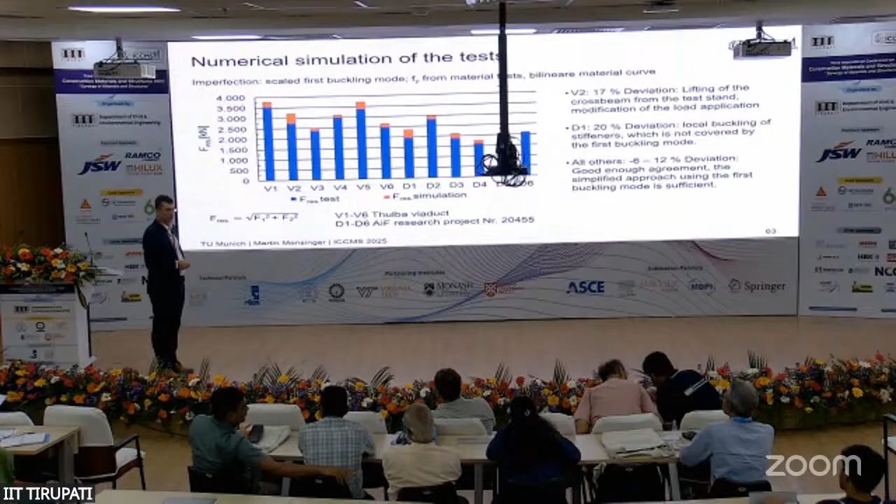And this is because I think we are not able to perfectly define the load introduction eccentricities of the load device, because the load stays at the same height and the specimen moves up and down a little, and this is really difficult to simulate. Yes, and I think that's the reason why we were not able to have a perfect fit from the numerical simulations to the tests.

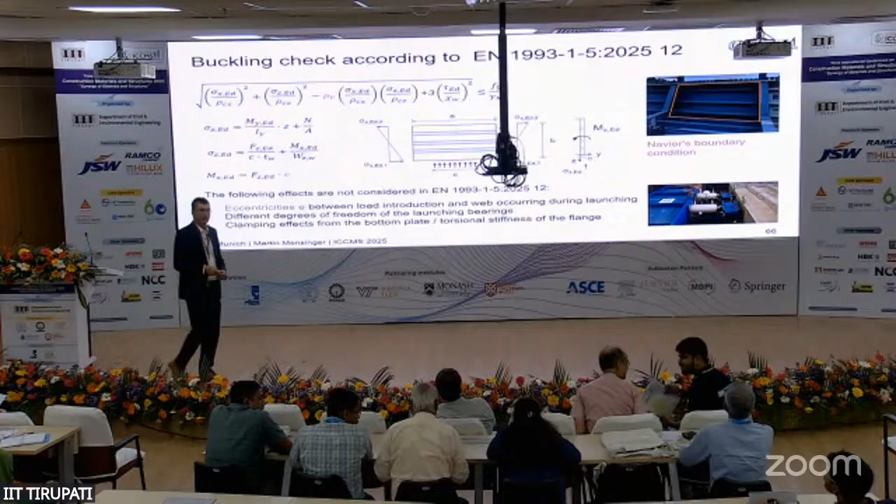Okay, and if you look again at the reduced stress method, we are also able to recalculate the stresses of our test specimen just with a simple approach, and then we are able to calculate the design according to Eurocode 3 with our results from our numerical simulations. And we did that for quite a high number of geometries within the frame of a parametric study. And what we found out is that the Eurocode is very conservative compared to our numerical calculations, even in case of spherical bearings, but only to a certain degree of eccentricity.

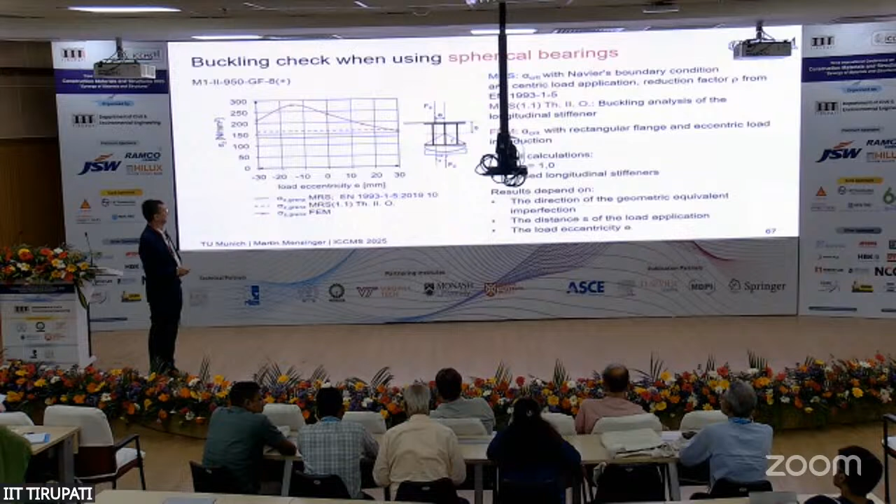If we have a larger eccentricity, larger than 30 millimeters, we will really have a problem, so that the design check as it is now will also come to the unsafe side. And if we are able to limit the eccentricities, at the same time it will be very much on the safe side. In my opinion, there's a need for discussing to further develop the design check. And in case of roller bearings, we are just very conservative.

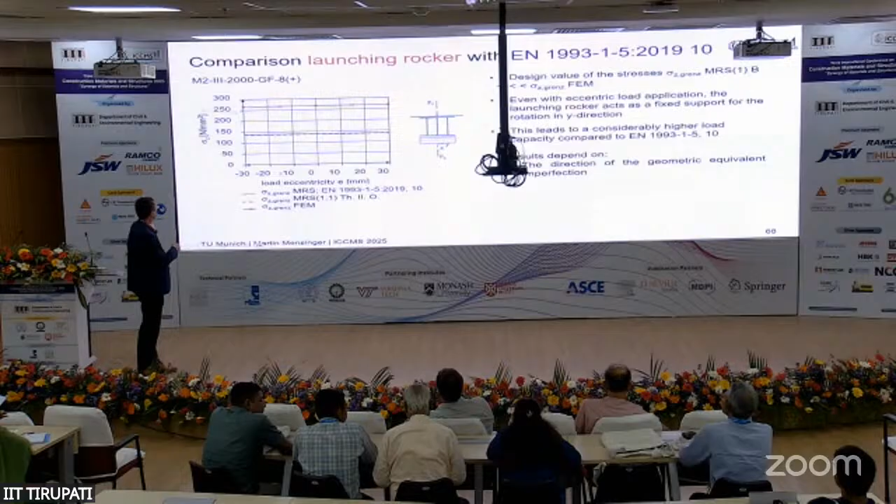So you can see here, in our stresses we can take about 250 megapascal, and according to Eurocode in that particular case, it's just an example, it's only less than 150 megapascal. So also in the frame of optimizing structures, also for sustainability, minimizing material consumption, we should discuss if this design check is not too conservative.

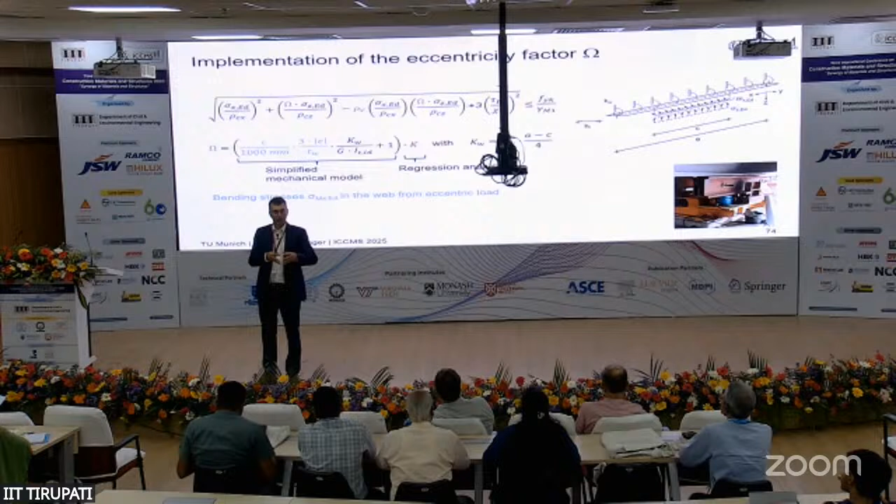Okay, that's why we are trying to introduce a new coefficient omega. We derived this new coefficient omega with just a simple engineering model, very simple, just springs and torsional stiffness is needed, and a numerical calibration factor K, which is also introduced, and we are introducing this in this formula. And then we can also use this factor omega to introduce the different launching devices. We can have a different omega for spherical bearings and for roller bearings; this also allows us to implement realistic support conditions into the buckling check.

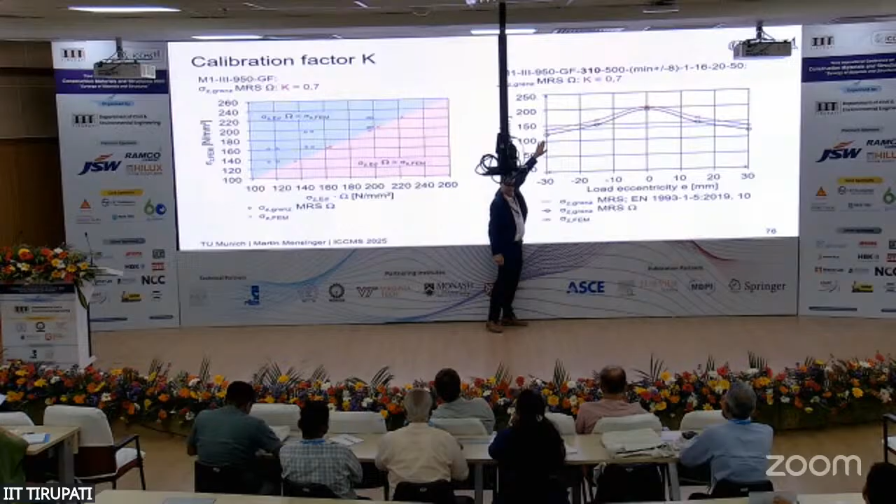And we did also some probabilistic things in order to verify if we are on the safe side, and that led to the definition of the calibration factor K to 0.7. And again, in case of the spherical bearings, we will now have a still conservative approach compared to the numerical simulations, but which is also able to consider the eccentricity of the load introduction, the bending moments in the web panel resulting from this eccentricity, which is not possible up to now. And in some cases, we will also see that we have to increase the web thickness or limit the eccentricities for our bridge. And I think this is a big progress, not only for economy, but also for the safety during launching.

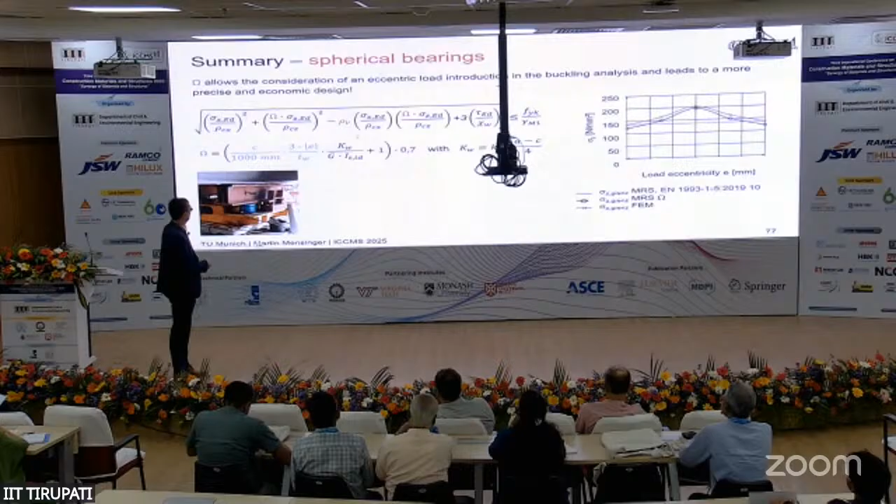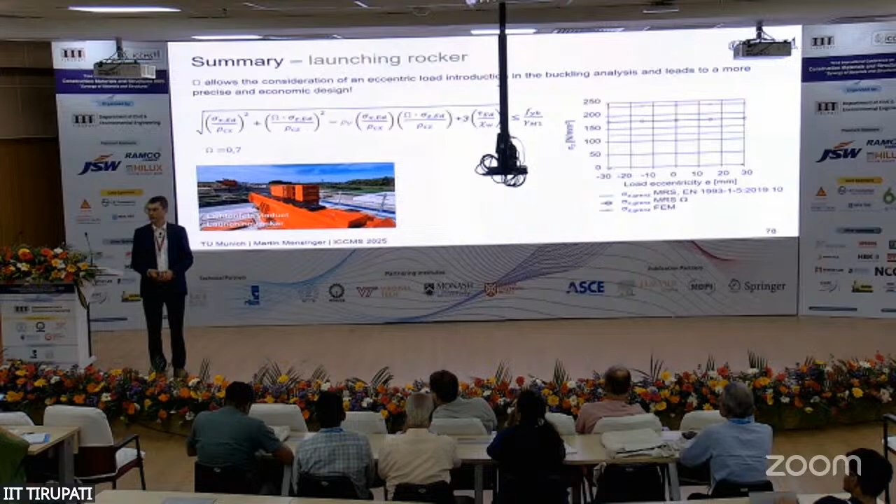And this is a simple formula for the spherical bearings. We recommend omega with this nice formula, factor 0.7. And in case of launching rockers, we recommend that omega is also a fixed value, 0.7. So we are just lowering the safety margin of the design a little bit in order to allow more economic and therefore also more sustainable construction in this field.

Okay, that's it. I hope I'm still in time, which is not easy in case of a complex topic, and I'm well known in Germany for not keeping my time. So today I really did my best.